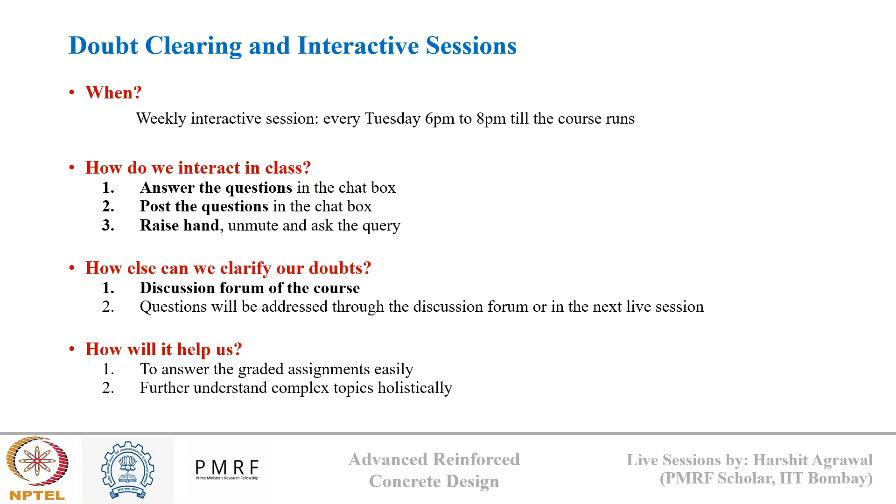In today's session, we'll first have a quick recap of the week 2 live discussion session we conducted last week, then we'll review week three learnings. In the week three recordings, it was oriented towards the durability of concrete, where we first had a basic overview of durability, then how concrete quality and aggressiveness of the environment causes durability issues was discussed, along with different ion transport mechanisms, different types of chemical degradation, mechanical degradation, and corrosion of reinforcing steel. At the end, how design codes incorporate durability consideration while mixture proportioning was presented.

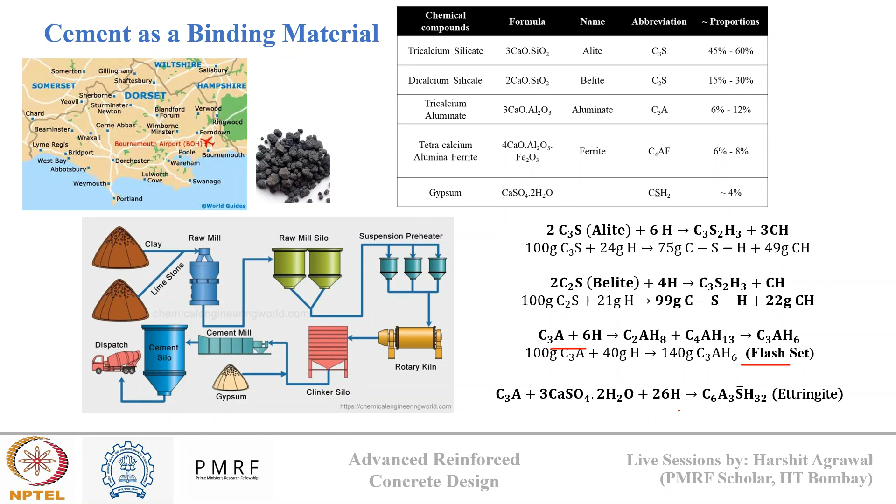Then we discussed different types of cement in detail. We discussed about different types of ASTM cements and how they differ in chemical composition, in compound composition, and what are their application areas based on their composition. We also saw the BIS classification of cement apart from this ASTM classification.

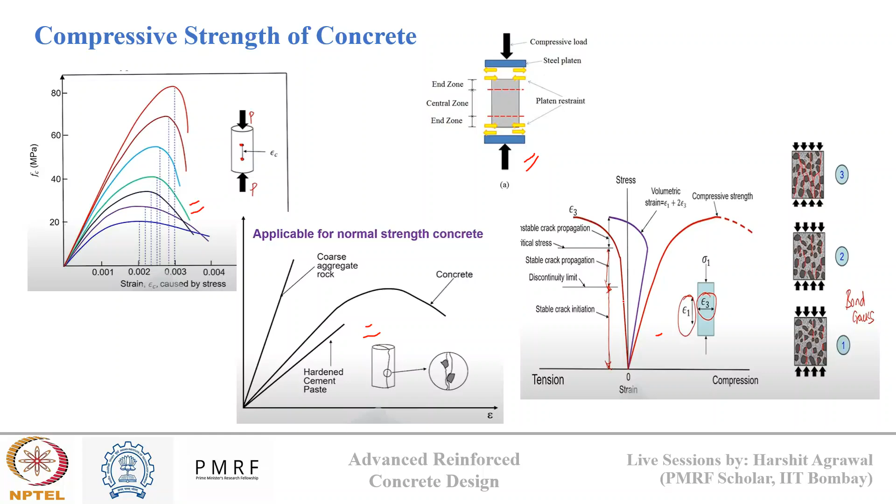Then we discussed about compressive strength of concrete, how the stress versus strain profile differs for different grades. We talked about stress versus strain profile of aggregate, cement paste and concrete and how this affects the failure plane. We talked about end platen effect and how it differs between cube and cylinder, and we saw how failure of concrete occurs in compression by seeing the crack propagation, creation of failure plane, and the change in the stress strain profile of the volumetric strain.

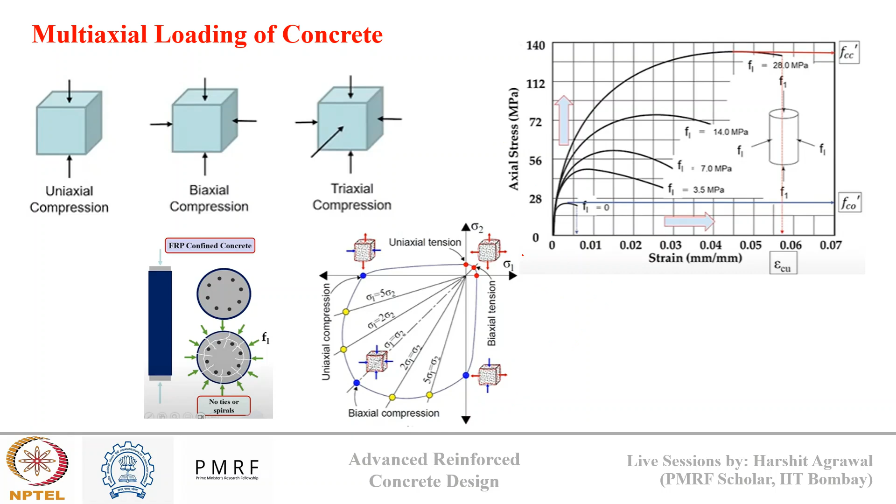We discussed multi-axial loading of concrete and how it increases the compressive strength of concrete, mainly due to the confining pressure created by the lateral stresses, which nullifies the tensile stresses generated when we apply uniaxial compression load. Apart from this, we talked about MOE of concrete, tensile strength of concrete, and then long term behavior of concrete in terms of creep and shrinkage.

Finally, we discussed steel reinforcement material, the effect of grade on the stress versus strain profile, and how this profile is used in design. We also talked about different types of alloyed and coated reinforcement, mainly in cases where corrosion is a threat, and we talked about FRP bars. What is one of the basic problems with those rebars?

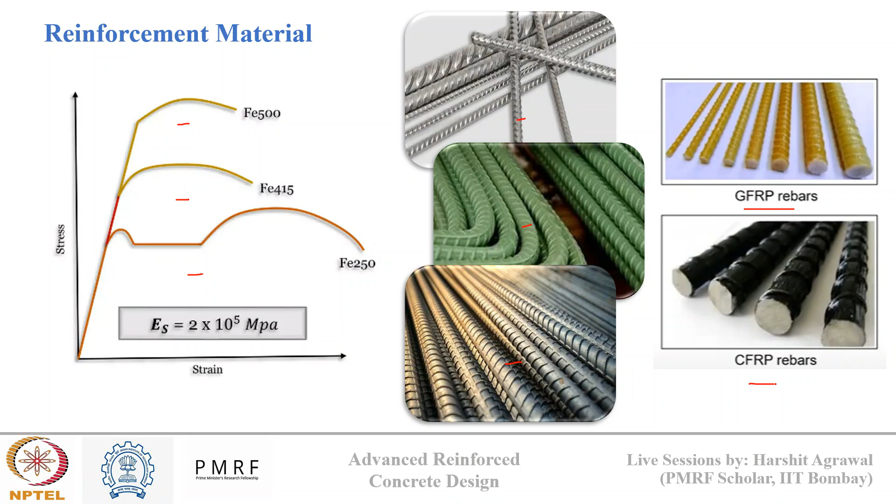Okay, so this completes the story from the last live session. Till date, we have talked about individual components of reinforced concrete, the design methods, and the mechanical properties of concrete. Now, the final segment of basic concrete discussion is the durability of concrete.

So, when we talk about modern day concrete applications, is having adequate strength enough for concrete design? The answer is no, it is a clear no. Why? This is evident from the rising environmental concerns that we see, which leads to premature deterioration of modern structures. That's why durability of concrete has become as important a factor as strength of concrete.

Now, what is the technical definition of durability? What do you mean by durability? If we see the definition given by ACI code, durability of concrete is defined as its ability to resist weathering action, chemical attack, abrasion, or any other forms of deterioration. So this is what durability as a word means.

But now, when do we say that a concrete is durable? How do we define concrete as a durable material? For that we have a definition given by IS code. A durable concrete is defined as one that performs satisfactorily under expected exposure conditions for a specified service life or lifespan of a structure.

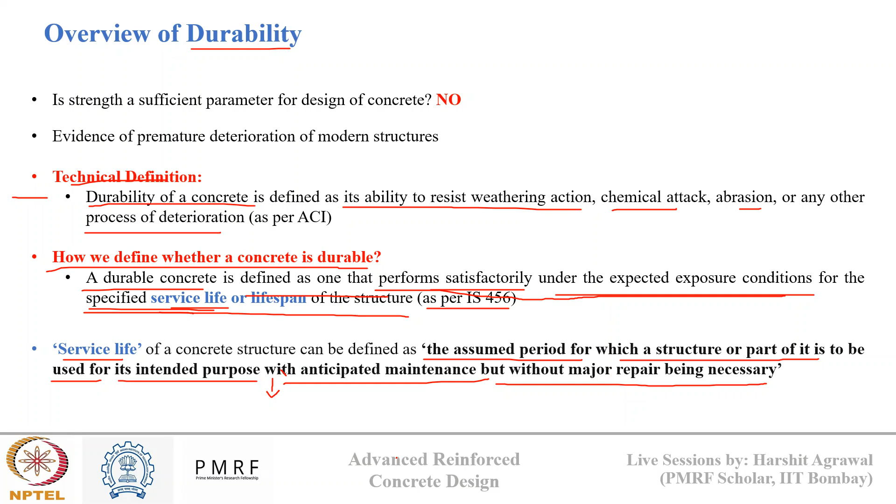Now this concrete system quality will depend upon both the material used and the process of preparation of concrete. By material I mean the binder type, binder content, aggregate, admixture, and mixture design. All will define the quality of concrete.

And the process — by process I mean how the mixing is done, how the transportation is done, how the compaction is done, whether it is cured properly or not, whether it is cured at adequate temperature or not, and whether proper workmanship was ensured while concreting. It will also define the quality of the concrete that is produced.

And if there is poor quality concrete, there will be a high risk to durability. If there is good quality concrete, the risk to durability will be reduced. So this is the concrete side of durability.

And the aggressiveness of the environment decides the degradation or deterioration of concrete, even for a bad concrete or a good concrete, any kind of concrete. So aggressiveness of environment again can be divided into two categories: it can be physical or it can be chemical. In physical we have abrasion, erosion, cavitation, and freeze-thaw, which we'll discuss later in this session.

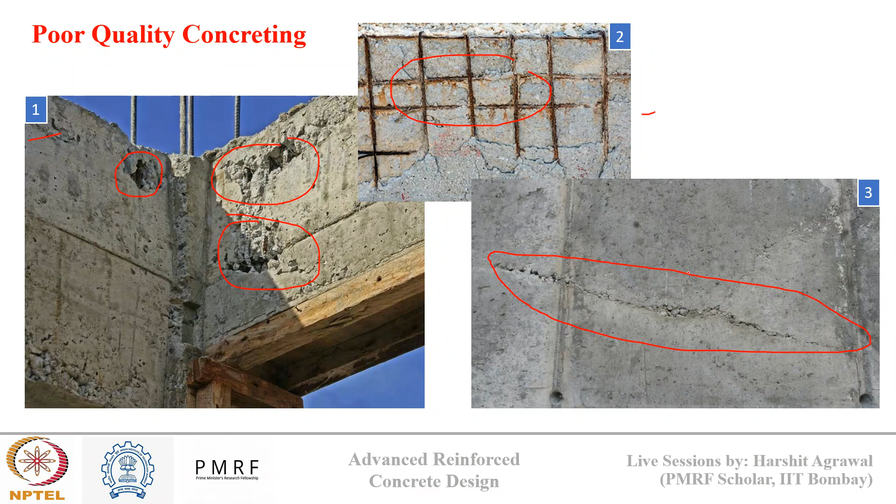And in the third image you can see the presence of a cold joint in this wall, which can happen if there is a significant time gap between two pours of a concrete mix. So this can also give rise to durability issues. These are just some examples of this second part, the process, showing how process can cause durability issues.

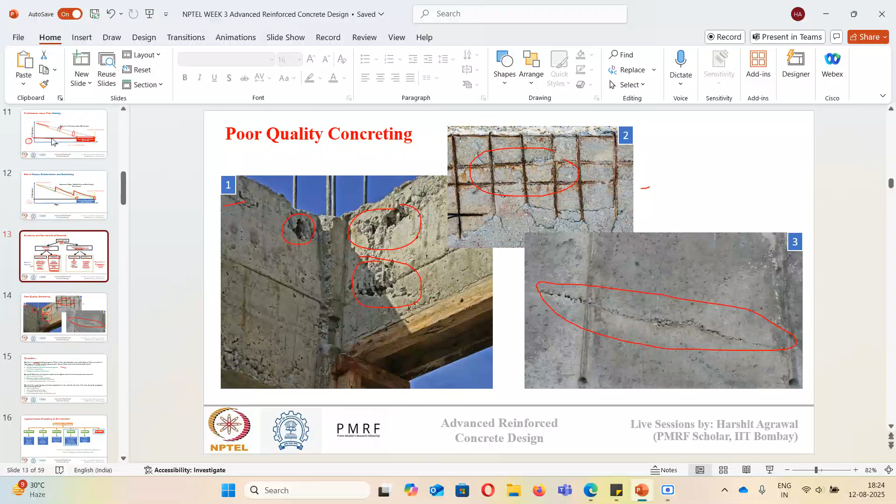Now question number 3. Has anyone answered? Okay, let's discuss. In a graph showing performance degradation versus time, what does the slope of the curve during the propagation phase primarily represent? This entire decrease is the propagation phase, where performance is degrading over time. The correct answer is D, the speed of deterioration due to environmental action.

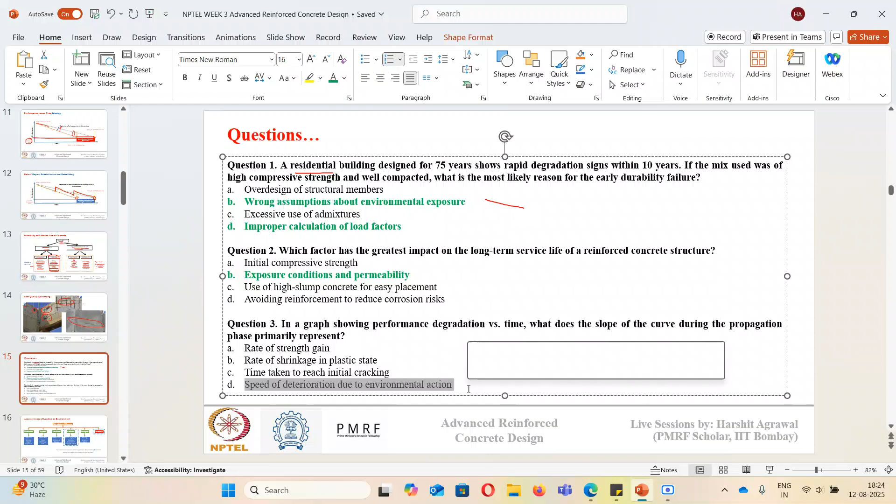If the slope of this line is steeper, it means there is a higher rate of degradation happening to the performance of concrete. If the slope is less, that means the performance is able to retain for a longer time, so the degradation of performance is lower.

Let's move ahead. Talking about durability of concrete, it can happen in several ways. There can be several reasons which cause durability issues in concrete. There is mechanical degradation, which can happen due to abrasion, erosion, impact, and explosion. There is physical degradation, which can happen due to freeze-thaw impact, creep and shrinkage as we've seen in the last session, and due to fire as well. Structural degradation can happen due to overloading, settlement, and fatigue.

In overloading, incorrect consideration of load factor can give rise to overloading issues. Fatigue is a long term effect that can come from creep and shrinkage, and settlement is due to poor consolidation of the soil underneath. There's also chemical degradation which can happen due to different chemical reactions occurring in concrete, biological degradation due to fouling and biogenic attack, and corrosion of reinforcement steel.

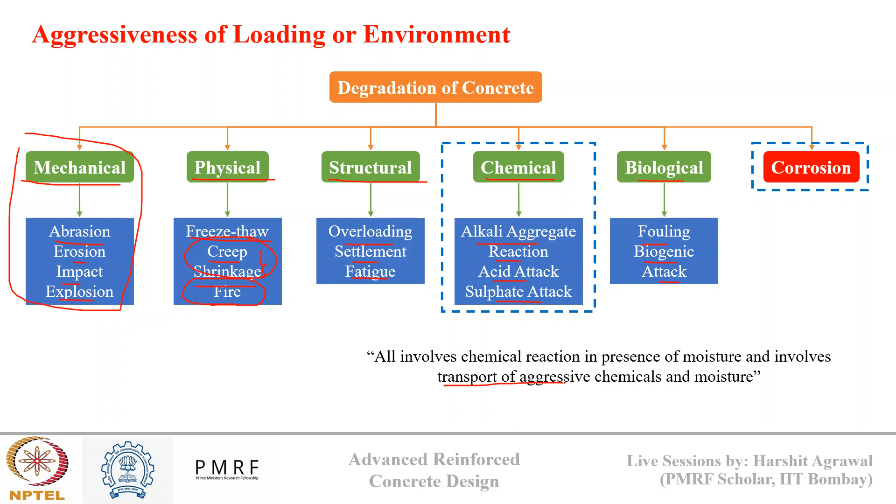Today we'll mainly be discussing chemical degradation, mechanical degradation, and corrosion. Among these, both chemical degradation and corrosion involve the presence of moisture as a key agent contributing to the ingress of aggressive ions passing through the concrete. The lower the permeability of concrete, the better it will be able to resist aggressive environments. That's why transport of ions through concrete is also a major point in durability.

When we talk about transport of ions or moisture, they can be affected by several factors, clubbed into three categories. First is the quality of cover: both cover thickness and pore structure inside the concrete will govern the rate of moisture and ion ingress. Lower cover thickness means faster penetration to deeper depths, and more pores inside the concrete means easier penetration of ions and moisture.

The second category is environmental conditions, defined by the availability of moisture in the atmosphere, the availability of aggressive ions, and the temperature of the surroundings. The more severe the exposure, the higher the durability risk, and the more moisture available, the higher the chances of ion penetration into the concrete. These two are direct reasoning that you can understand.

Temperature is also a factor, because it can lead to moisture evaporation and cracking in the cover, which is why it is included in environmental conditions. In hot and humid weather, there are chances of more creep and shrinkage effect occurring in concrete, which can also give rise to durability issues.

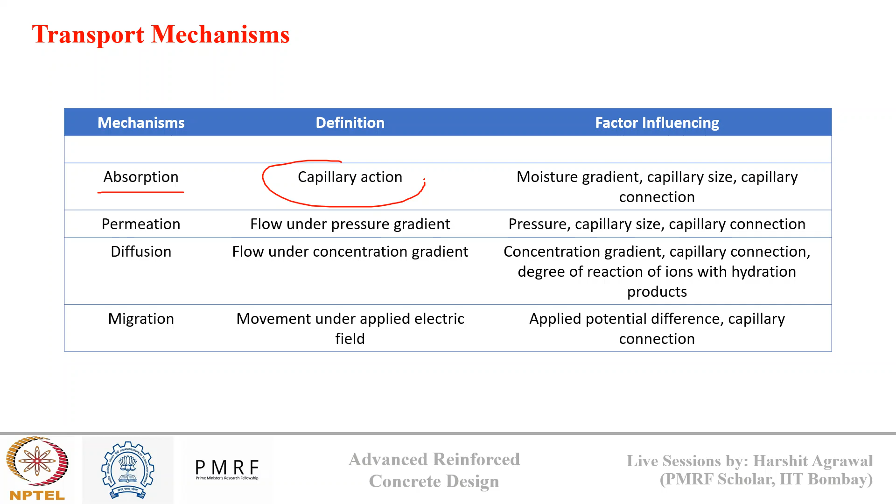So here, if you see all these four transport mechanisms and what factors influence them: when we talk about absorption, it is the capillary action, the movement of moisture from higher concentration to lower concentration, and that is defined by the moisture gradient present, the capillary pore size, and the pore connection.

In concrete, there are different types of pores - capillary pores, macro pores, and micro pores, mainly if we classify. This absorption is governed by the macro pores, in which we have the capillary pores. So how these pores are distributed, what are their sizes, and how they are connected, that will govern the ingress of moisture.

Then there's permeation. Permeation is basically flow under a pressure gradient. From higher pressure to lower pressure, the flow of ions can happen, and that will again depend upon the capillary size, capillary connection, and the amount of pressure gradient present.

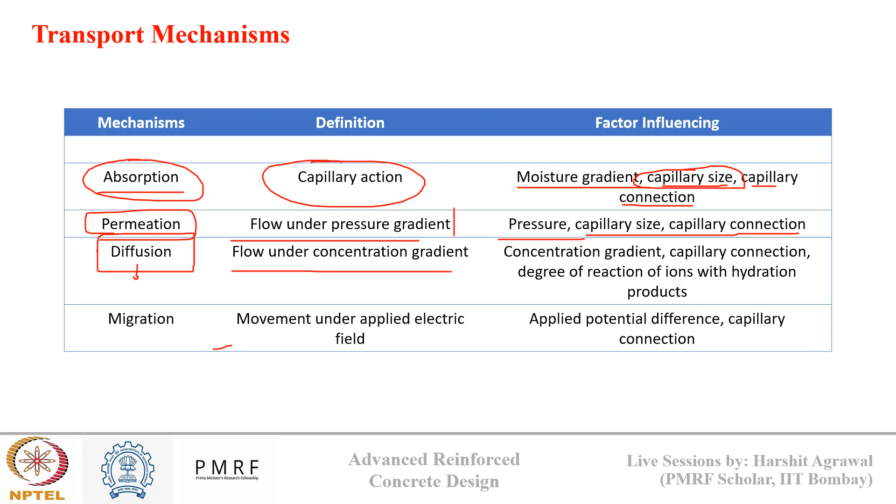The third and very common mechanism of degradation in concrete is diffusion, defined as flow under a concentration gradient. Suppose my environment has a higher concentration of aggressive ions, and in my concrete system there is low concentration of ions - due to this there will be diffusion from higher to lower concentration. This is defined by the concentration gradient; the difference between these two will define the rate at which diffusion occurs.

Then capillary connections is one thing that will define how fast they are moving inside concrete. The degree of reaction of ions with hydration products is one more thing - there are certain ions in the environment that can interact with the paste system inside the concrete. So the degree of reaction of these ions with the paste system can also govern the rate at which they move inside, and that can govern the rate of diffusion of ions.

And then there is migration. Migration is the movement of ions under an electric field. The first three categories we saw are naturally occurring. Migration is something that is forced - we apply an electric field using a direct current supply and force ions to move inside.

So suppose there are negative chloride ions present in the atmosphere, we force them to move inside towards the opposite electrode - from the negative electrode to the positive electrode, so these ions are attracted towards the positive electrode. We are migrating these ions forcefully towards the steel reinforcement or towards the other side of concrete. That is what is known as migration - forceful movement of ions under an applied electric field.

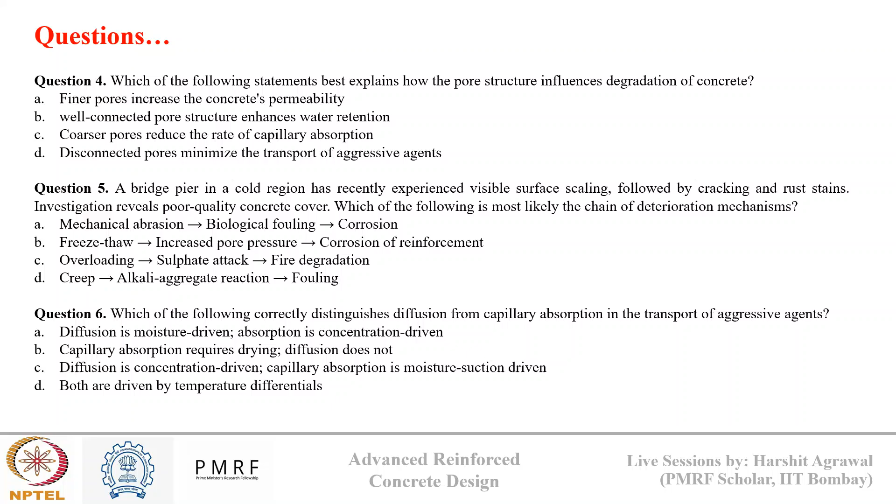Let's see the answers now. For question number 4: which of the following statements best explains how the pore structure influences degradation of concrete? The correct answer for this will be D - if there are more disconnected pores inside the system, the connectivity of pores will be lower, so that will minimize the transport of aggressive agents or ions through concrete.

Someone answered B also: 'well connected pore system enhances the water retention.' Here, water retention means the amount of water inside the concrete - we don't want more moisture inside the concrete. So this is a negative statement, not a positive explanation of how pore structure is influencing the degradation. Here the influence we mean is in terms of movement of transport ions.

Question number 5: a bridge pier in a cold region has recently experienced visible surface scaling followed by cracking and rust stains. Investigations reveal poor quality concrete cover. Which of the following is most likely the chain of deterioration?

Okay, so here the keywords are cold region, surface scaling, cracking and rust stains, and poor quality cover. So from this, can anyone predict what can be the reason?

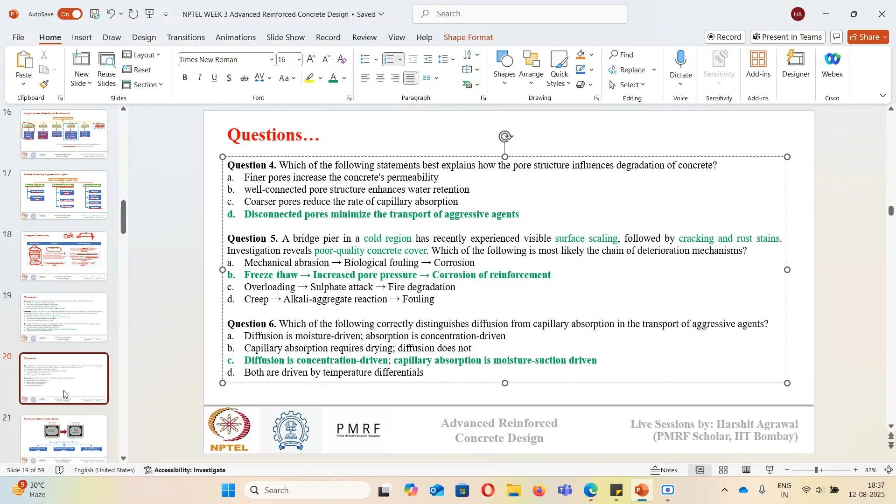Try to answer these two more questions related to the contribution of pore structure or pore connectivity of concrete.

I'm having a headache - too much screen time in one day. 40 slides left.

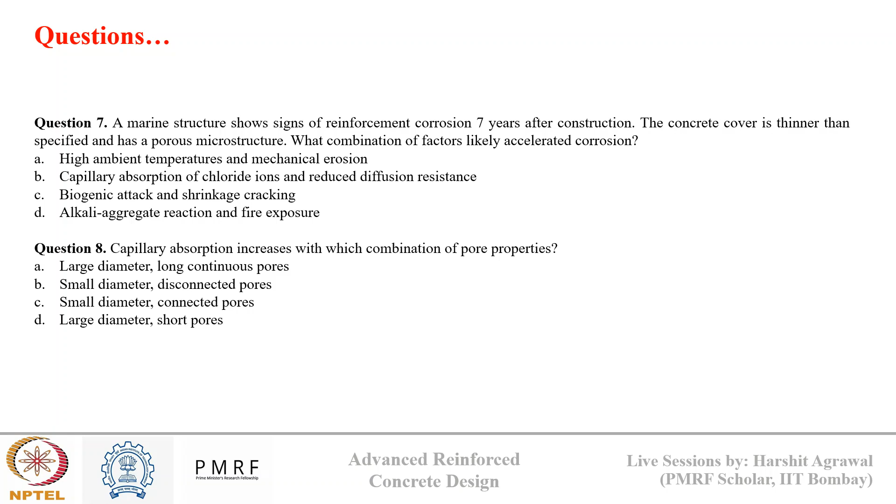Okay, let's see the answer. For question number 7: a marine structure shows signs of reinforcement corrosion 7 years after construction. The concrete cover is thinner than specified and has a porous microstructure. What combination of factors likely accelerated corrosion? Okay, so it will be option number B.

Since there is a porous microstructure, there will be capillary absorption of moisture and chloride ions, which has accelerated the diffusion process, reducing diffusion resistance. Since the diffusion of ions was accelerated, corrosion was visible well before it should have been. And since the cover is also thinner, the ions will reach deeper depths before they should have, so that's why option B will be correct.

Question number 8: capillary absorption increases with which combination of pore properties? Okay, so the correct answer for this will be...

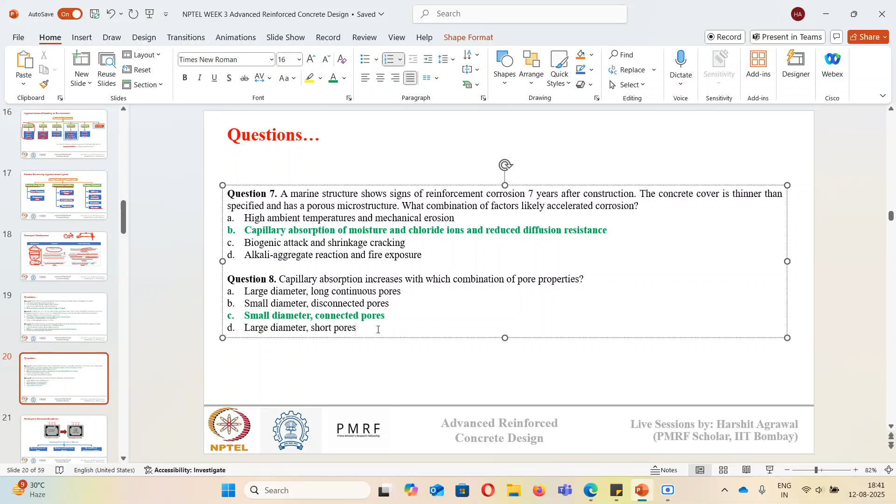So smaller diameter and connected pores will be the correct option. Smaller diameter generates more capillary pressure for ion ingress, and connected pores ensure that ions and moisture move to a larger depth. In larger diameter pores, the capillary effect is not as strong as compared to smaller diameter pores. B won't be correct because those pores are disconnected - if you want to increase capillary absorption, we need connected pores, not disconnected pores.

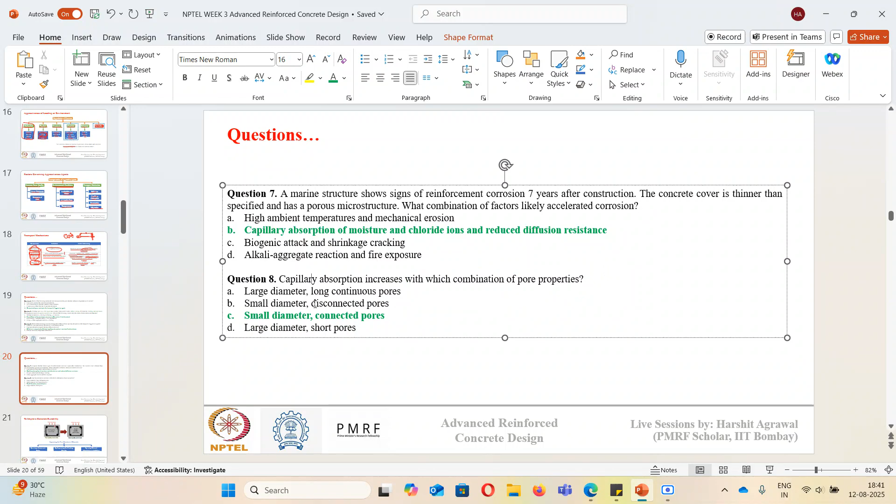Any doubts in these questions? Okay, let's move to the next part.

So we saw that in transport of ions, it's the poor quality of concrete cover which is a major issue. So to improve the durability of this cover concrete, it is important to use a good quality concrete for the cover. So in poor quality cover concrete, what will happen?

Deleterious or deteriorating ions will reach the reinforcement fast, or they will penetrate to a deeper depth fast. However, if you use a good quality cover concrete, this rate of movement of ions will be lower, so we will have a good quality concrete for a longer life.

Now, how to improve the durability and quality of concrete? This can be done by improving the pore structure of concrete, which can be achieved in one of three ways: using a lower water to cement (W/C) ratio, improving the packing density of concrete, or using mineral admixtures as additives.

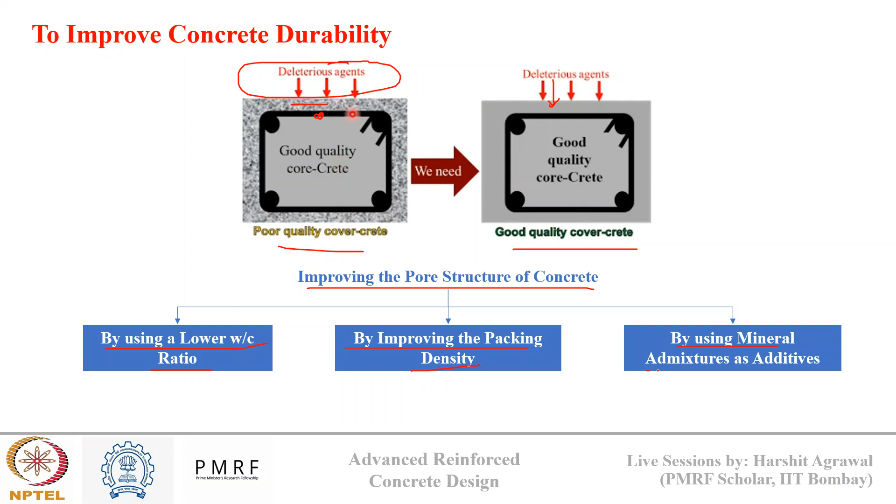When there are more pores in the system, they provide an easier path for moisture and aggressive ions to penetrate through the concrete. So having a lower W/C ratio gives us a dense, compact microstructure with fewer, smaller, and more disconnected pores, which significantly reduces permeability and increases the durability of concrete.

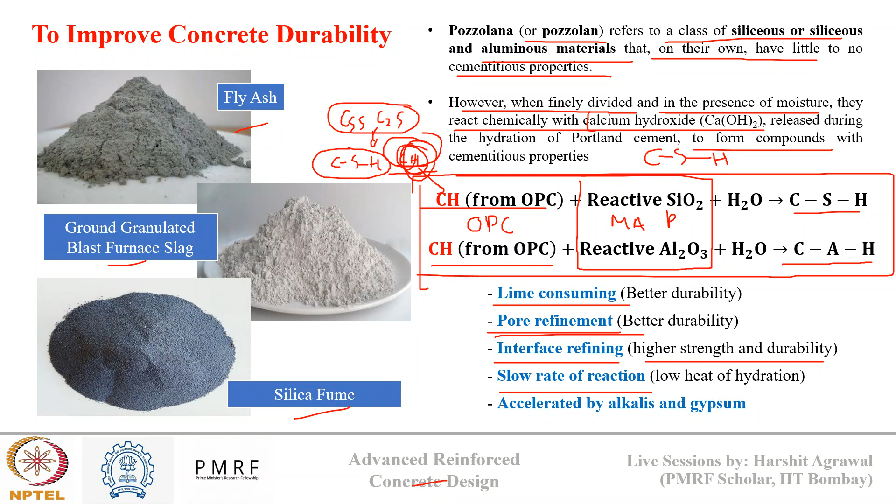These reactions sometimes have a slow rate of reaction because they depend upon the CH released by the C3S and C2S from OPC, and this CH is what is consumed by these pozzolanic materials. So they have a slower rate of reaction and a low heat of hydration, which means they don't cause durability issues in terms of cracking. If we need to accelerate this, we can do so by addition of alkalis and gypsum.

This is beyond the scope of this course, so you can just remember the key points: lime consuming, pore refining, and interface refining. At the same time, it has a lower heat of hydration. So in this way, they can improve the durability of concrete by forming a more dense microstructure.

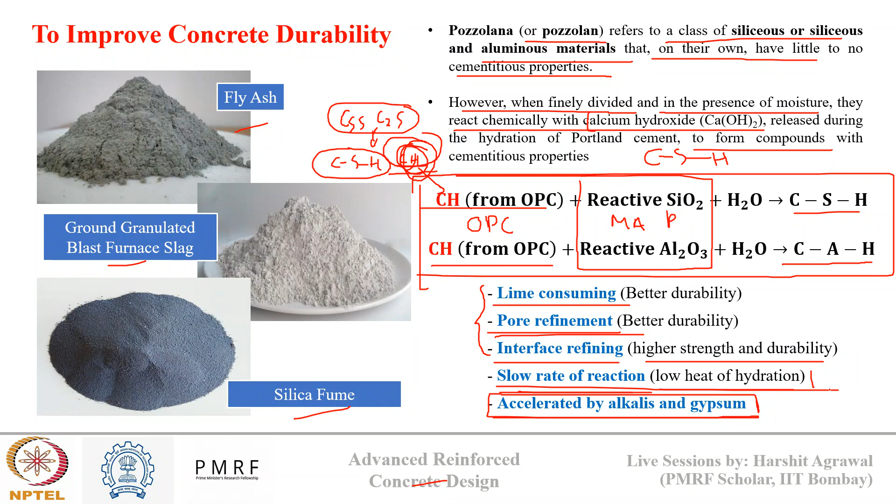Then there are accelerators, which do the opposite - they speed up setting, which is needed especially in cold weather concreting where we need faster strength gain and early strength gain.

Then there are shrinkage reducing agents which minimize cracking due to shrinkage issues. There are superplasticizers which improve the flowability of concrete, so there is less chance of honeycombing when we are pumping the concrete.

There are air entraining agents which resist the freeze and thaw effect in concrete - we'll see why we need pores inside concrete in cold climatic conditions. And finally there is corrosion inhibitor, which forms a kind of protective layer over the steel surface, protecting it from aggressive ions and increasing durability.

So these are some of the ways chemical admixtures contribute to enhancing durability of concrete. All in all, each admixture plays a vital role in extending the service life of concrete, and the choice of admixture depends upon the condition, the aggressiveness of the environment, or the quality of concrete we want to produce.

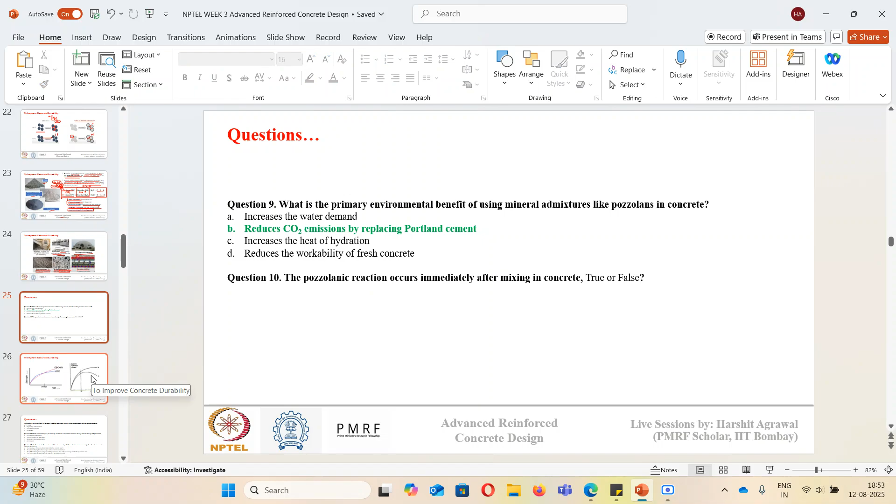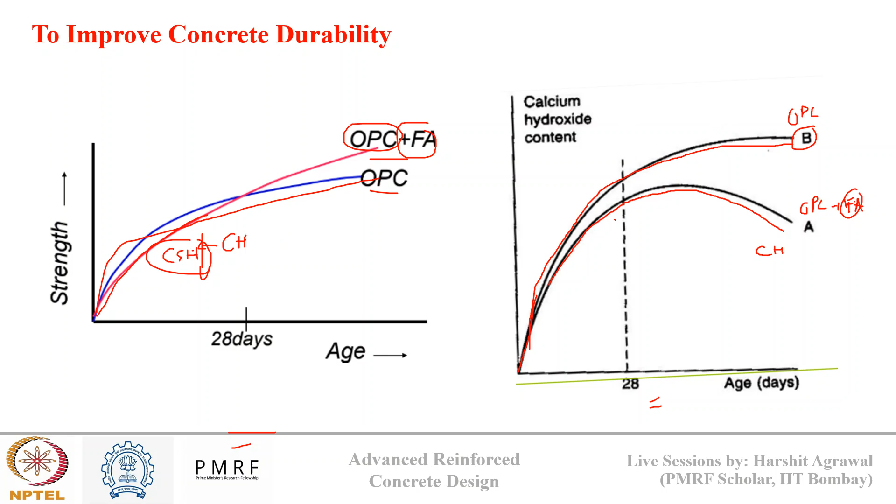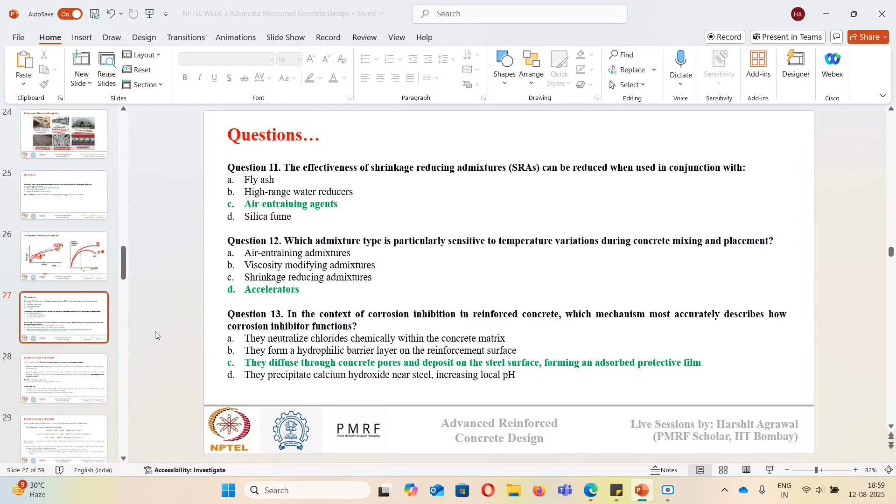All these are admixtures, so they are used initially during concreting. Any doubts in this part? Let's move ahead.

Now we'll start with chemical attacks, beginning with sulfate attack. Sulfate attack is basically the reaction between sulfate ions and the hydrated cement paste products. There can be two forms of sulfate attack: external sulfate attack and internal sulfate attack. External sulfate attack means sulfate ions are ingressing into concrete from the external environment, which can be groundwater, seawater, or due to bacterial action in sewer lines. These sulfate ions ingress into the concrete and cause degradation, which comes under external sulfate attack.

Internal sulfate attack means there is a release of sulfates inside the concrete itself. In this case, formation of ettringite occurs after the concrete has hardened, which we call delayed ettringite formation—we'll see in a couple of slides how this causes a problem. So just understand the difference: external sulfate attack means sulfate ions move into concrete from the environment causing degradation, while internal sulfate attack means there is a late release of sulfate ions inside concrete causing the degradation problem.

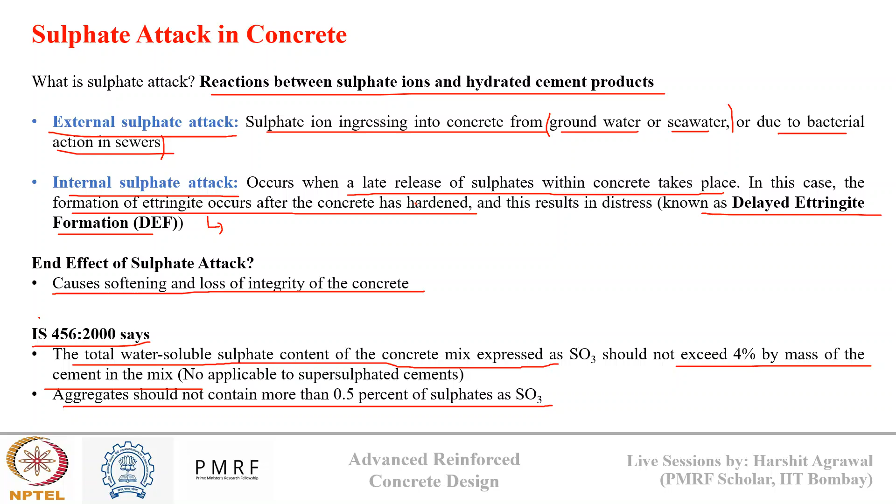Aggregates should not contain more than 0.5% of sulfate. So to tackle this degradation due to sulfate, various limits have been imposed by Indian standard.

This ettringite formation is occurring when sulfate reacts with monosulfates and C3A. So these are sulfates reacting with monosulfates and calcium aluminates to form ettringite.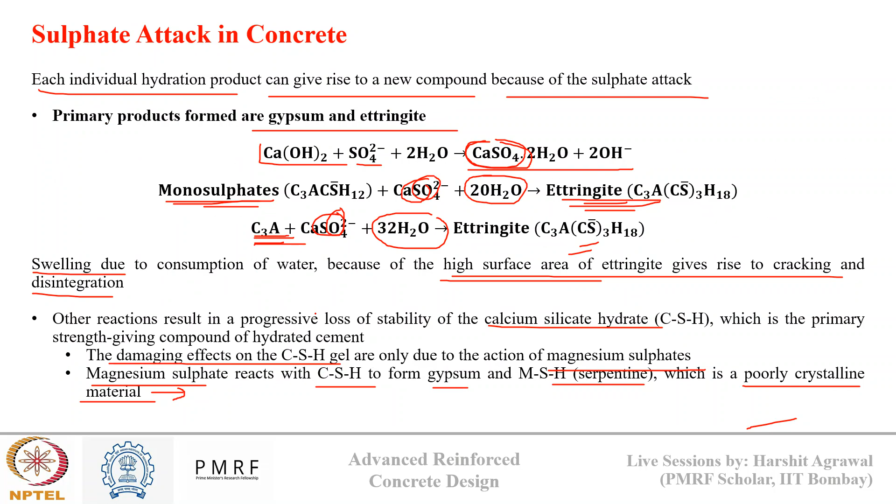So it's not just one source of sulfate - there can be different salts of sulfate which can attack concrete in different ways. This was external sulfate attack - how sulfates from the atmosphere cause problems due to swelling, causing degradation in concrete.

Now, when we talk about internal sulfate attack, there is a thing known as delayed ettringite formation - it means formation of ettringite in concrete at later ages after the initial curing period. This condition arises in concrete that has experienced higher elevated early temperature. So at initial time during curing, if there is high early temperature, which can be imposed due to heat treatment or significant internal heating or due to moisture, what happens is the formation of ettringite is not happening initially.

Initially, we have gypsum in the system - the reaction between gypsum and C3A won't happen if the temperature is very high initially. Now there is sulfate present in the pore liquid, usually for a long period, because it is not consumed initially. However, at later ages, once the concrete has hardened, this temperature will reduce, and then sulfate will start reacting with calcium and aluminate phases to form ettringite.

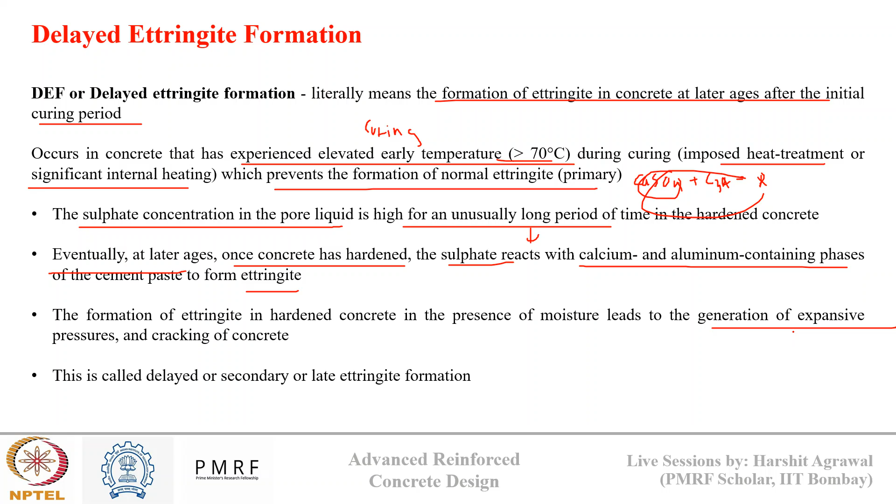This delayed reaction of sulfate and calcium aluminate phases gives rise to expansive pressure because ettringite has higher surface area, and it causes cracking in concrete. This process is known as delayed ettringite formation.

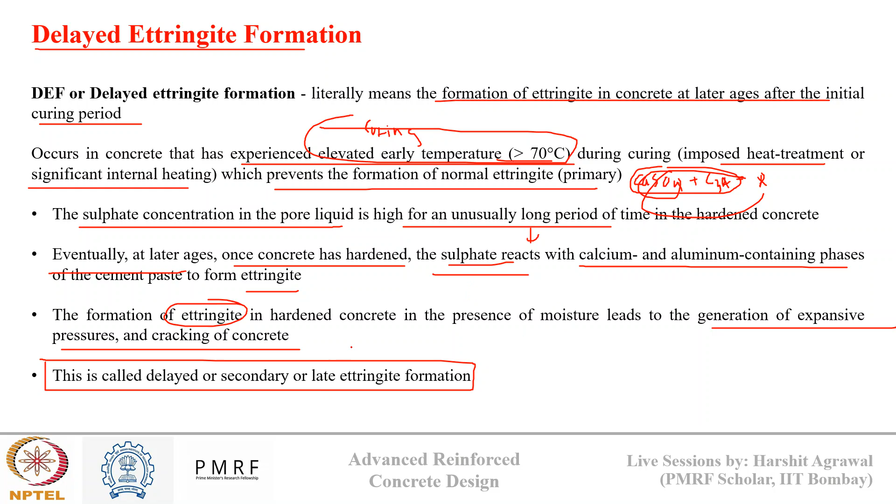So here, this elevated early temperature was the important thing which has given rise to delayed ettringite formation. Ettringite is forming at later ages than the initial age, and that ettringite has a higher volume compared to normal initial products. This higher volume, if formed in hardened concrete, can cause cracking issues. This is delayed ettringite formation.

Now we can see this effect of sulfate in the image. In the first image, you can see the paste-aggregate interface where ettringite lining is present, and it has led to 2.8% expansion. In the second image, you can see how a submerged column is experiencing bulging here and here due to sulfate attack.

And how to prevent this? We can prevent it by using sulfate resisting cement which has low C3A content - if there is low C3A content, there will be less ettringite formation and less sulfate attack happening. We can use SCMs which consume CH and create a dense microstructure that will lower the ingress of sulfate ions, making concrete impermeable. Or we can reduce the water-cement ratio also to make concrete impermeable - these can be some of the preventive measures for sulfate attack.

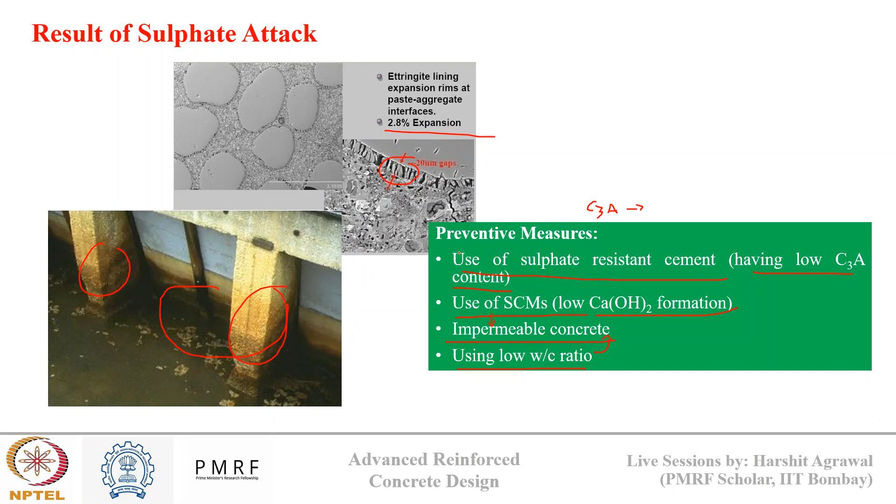Is everyone clear with the sulfate attack part? Any doubts in sulfate attack?

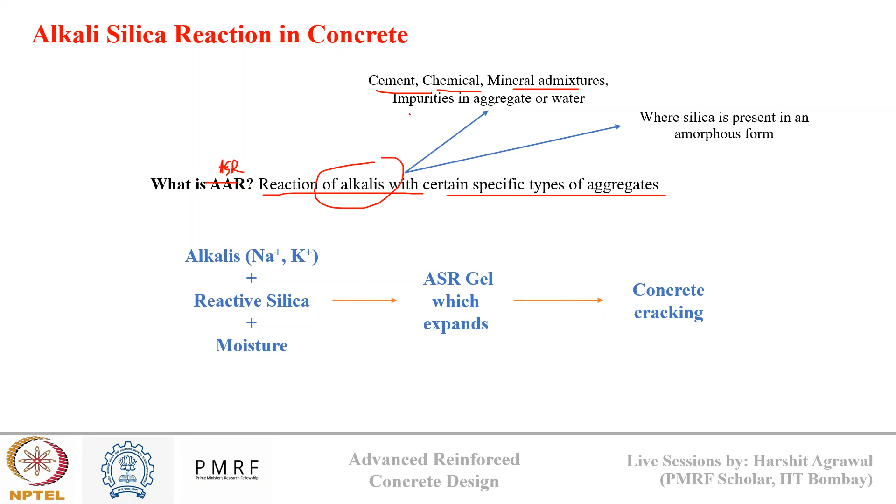Okay, so after sulfate attack, we have alkali silica reaction. So what is this? It is the reaction between alkalis with a certain type of aggregates. Alkalis are coming from cement and chemical and mineral admixtures, and maybe from impurities in aggregate and water, and silica is coming from aggregates.

So generally we want aggregates to be inert. However, if our aggregates are amorphous in nature, what will happen? They will have some reactive silica, and this reactive silica from aggregate can react with the alkalis present in the cement system to give rise to alkali silica reaction.

So if we simply write what is this alkali silica reaction: alkali ions like sodium and potassium, in the presence of reactive silica and moisture, form alkali silica gel, which is expansive in nature, and this expansive product in concrete can cause cracking in concrete.

So in both systems there is a similar thing, there is expansive product formation. When we talk about a hardened concrete system, we talk about a dense microstructure which has very small porosity or very small gap. Porosity is generally like 5 to 10% in the system.

Now in this dense microstructure, when there is formation of some expansive product, what will happen? They will generate tensile stresses inside the concrete, and that tensile stress, if more than the strength of the concrete, can lead to cracking in concrete. So that's why we don't want expansive products in a hardened concrete system.

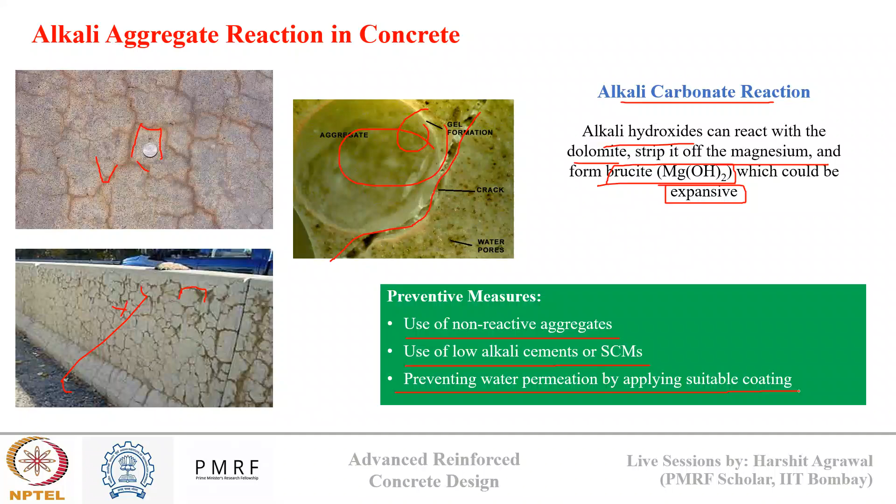How can we prevent this alkali aggregate reaction or alkali silica reaction? By using non-reactive aggregates, or by using low alkali cements or SCMs, or by preventing water permeation by applying suitable coatings on the surface. All this reaction requires water, so if we can reduce the ingress of moisture, then we can delay or prevent the alkali silica reaction from occurring.

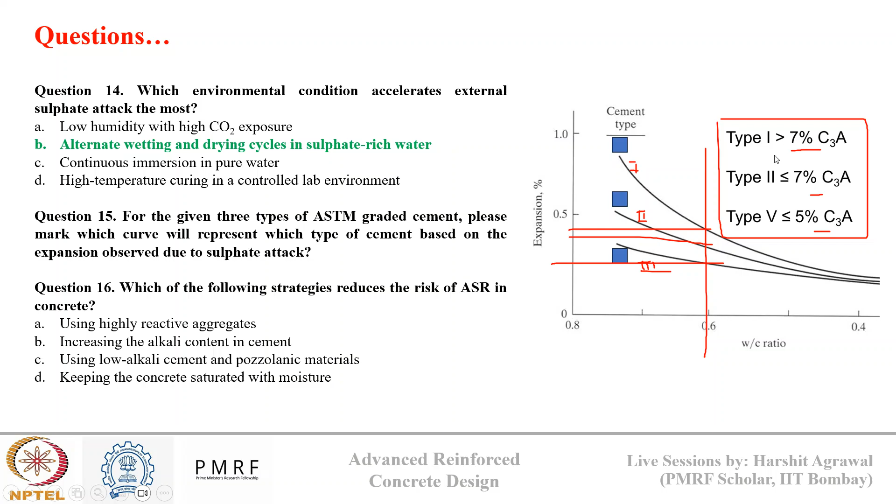For question 15, there is no option given. You need to tell me, for curve one, what cement type is present in this concrete which is represented by curve one?

If there is higher C3A content, there will be more sulfate attack chances, so there will be higher expansion - so curve 1 will represent type 1 cement. In type 2 cement, there is lower C3A content, and in type 5 cement, there is much lower C3A content. So curve 2 will represent type 2 cement, and curve 3 will represent type 5 cement. Lower the C3A content, lesser the chance of sulfate attack, and lesser the expansion. Expansion is due to ettringite formation, which swells in the presence of moisture. That expansion will be less where ettringite formation is lower, and ettringite formation will be lower where C3A is less.

Now question number 16: which of the following strategies reduces the risk of alkali silica reaction in concrete? What can we do to reduce alkali silica reaction in concrete?

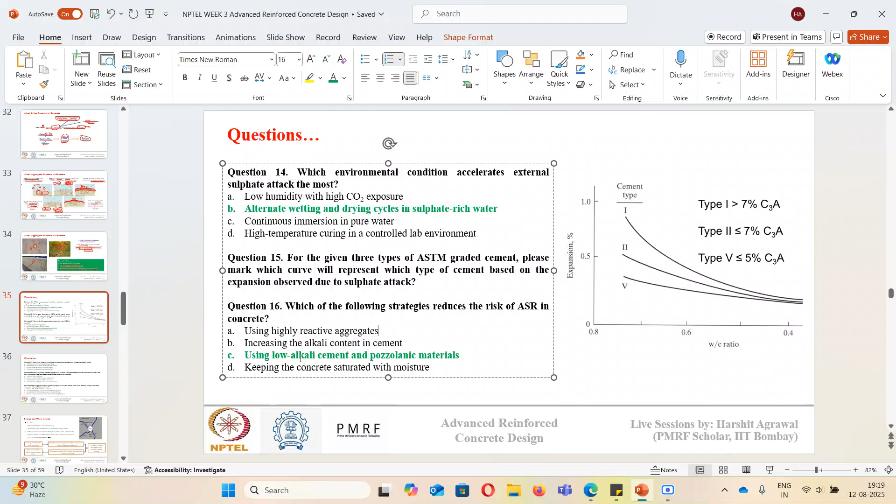The correct option is C. If we use low alkali cement, what will happen? Even if we have highly reactive aggregates, if the alkali presence is low, then the alkali silica reaction chances will be lower. And a better thing is to use pozzolanic material - it will densify the concrete and reduce moisture ingress. We saw in the alkali silica reaction flowchart that moisture is also an important step in that reaction, so if we have dense concrete, we can reduce the risk of alkali silica reaction.

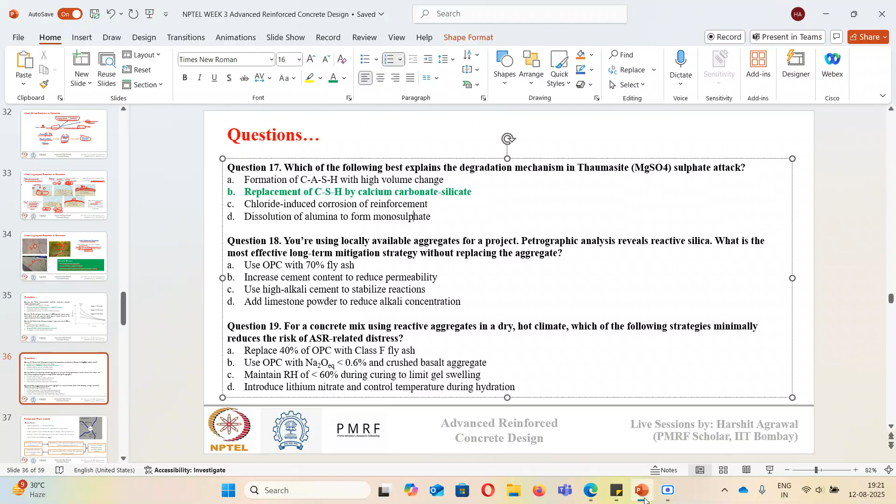For 18, the correct answer will be A. If we use a supplementary cementitious material as a replacement of OPC, we can consume alkalis, reduce the pore solution alkalinity, and refine the pore structure, which can help us reduce the alkali silica reaction chances in concrete.

Third question: for a concrete mix having reactive aggregates, which strategy reduces the risk of alkali silica reaction, and which strategy minimally reduces it? Which among these will be the least effective?

This is just a repeat of question number 18. Using OPC with fly ash will densify the pores and reduce the risk of alkali silica reaction. If we have OPC with low alkali content, we can again reduce the risk of alkali silica reaction. And sometimes introducing lithium nitrate also helps in reducing the chances of alkali silica reaction in the system.

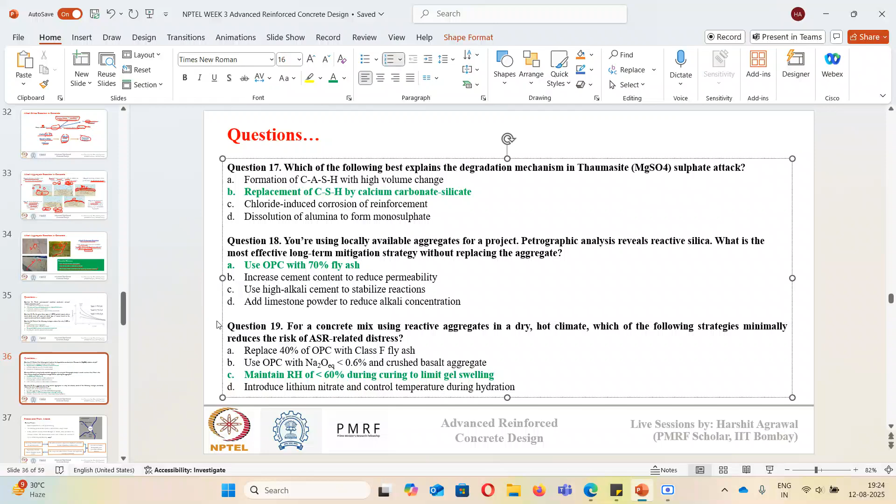Any doubts in these three questions? No, sir.

Let's move ahead to the final part of chemical degradation, that is freeze and thaw reaction. What are the critical points we need to take care of while understanding freeze and thaw? One thing is water expands by 9 to 10% upon freezing, so when water converts into ice there is an expansion of 9 to 10%. The freezing point of small pores is depressed by a larger extent, so the freezing point of small pores is much lower than big pores. Suppose water in a big pore is freezing at 0 degrees Celsius, the same water in small pores will freeze at minus 20 degrees Celsius.

If concrete remains frozen throughout its lifetime, it is not much of a problem. However, deterioration occurs only when there are successive cycles of freezing and thawing. Frozen water in concrete is not a problem; it's the repeated freezing, then conversion to water, then conversion to ice again, that causes deterioration in concrete. Now let's see how this occurs and why freezing and thawing is a problem.

Freezing of water starts in capillary pores. We've seen that larger pores freeze earlier than smaller pores, so the water in capillary pores will freeze first. Due to this, ice formation will start, and as ice formation starts, the unfrozen water experiences hydraulic pressure due to the formation of volumetric, expansive ice. This hydraulic pressure causes the water to start moving inside the pore system.

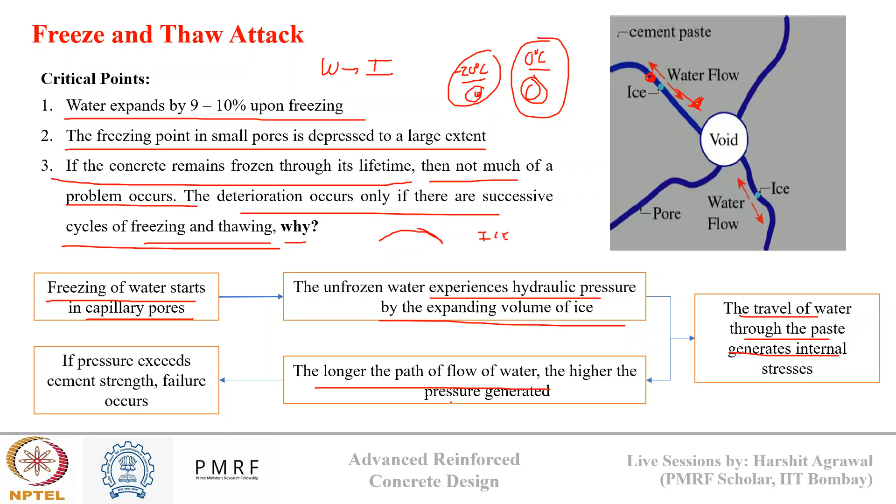Water will start to travel through the paste, and this movement generates stresses. The longer the path of flow of water, the more pressure it will generate. If this pressure exceeds the cement strength, it will cause failure in the concrete. So pressure generates and releases repeatedly, and over successive cycles this causes fatigue in the concrete system, leading to cracking and degradation of concrete.

Now, in such cases, that's why we have air entraining agents. What air entraining agent does is deliberately add voids inside the concrete. Now when water is moving inside the concrete due to formation of ice, if there's a void, it will be able to release its pressure that is getting generated due to water movement. And that's how air entraining agent mitigates the freeze and thaw problem inside concrete. They provide a relief station for water movement.

Here you can see some examples of what happens due to freeze and thaw attack, or frost action. In the first image, you can see how frost action causes rock to crack. Initially water was collected. Now water freezes and expands, which causes cracks in the rock. As the ice melts, the water penetrates to deeper depth. Then it freezes again, expands, and causes the crack to propagate further inside. In this way water goes deeper and deeper inside the rock, and finally it will crack the rock. So it is the freeze thaw effect causing the cracking.

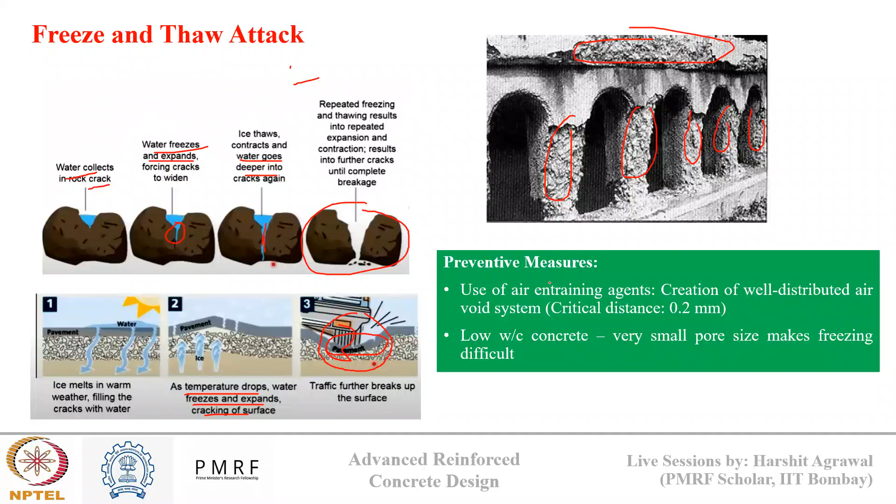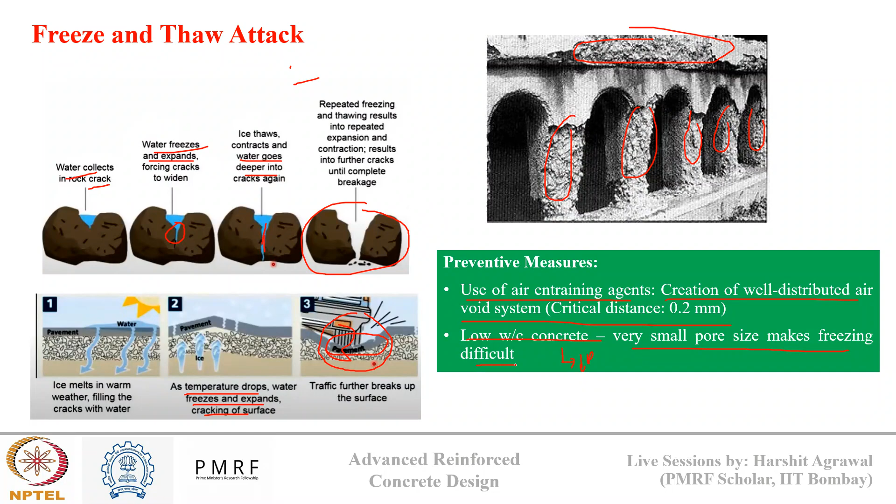Now, how can we prevent this? By using air entraining admixtures. They create well-distributed air voids in the system, which act as a relief point. Or we can use a low water to cement ratio concrete. This decreases the porosity in concrete. We saw that if there are smaller pores, freezing won't happen at higher temperatures. So very small pores make freezing difficult, and if freezing is difficult, this freezing and thawing effect will be reduced.

Any doubt in this part, in the freeze and thaw reaction part?

Okay, so let's move to the next segment. The next segment of degradation is corrosion in reinforcement steel.

Now, before understanding what corrosion is doing, we need to understand that corrosion is a natural phenomena. This will occur, we can't stop corrosion from happening. Why? Because initially in the ores, we have iron ore like hematite, magnetite, where iron is present in the form of oxide. Now when we make steel, we process this ore into steel, which is Fe. So we are giving energy to the system, increasing the energy state of the system. But what does the law of nature say? Every metal or material is stable in its lowest energy state. So this metal will start to try to convert back to its lower energy state, which is this ore state. And this process is what is known as corrosion. It is a natural phenomena, we can't stop it. We can control it, we can delay it, but we can't prevent corrosion from happening.

However, when we talk about a reinforced concrete system, the pore solution or porous matrix in concrete is rich in alkali ions, like NaOH, sodium hydroxide, potassium hydroxide, and calcium hydroxide. These are rich in the pore solutions or pore spaces of concrete, which causes high pH in concrete. And when there's high pH in concrete, there's a mechanism known as passivation of reinforcement steel. So when the steel rebar is present in a high pH environment, a protective film forms over the steel rebar, known as the passive film. This passive film shields it from further corrosion, reducing the rate of corrosion. The natural corrosion rate at which this reaction occurs will be reduced due to the presence of this passive film.

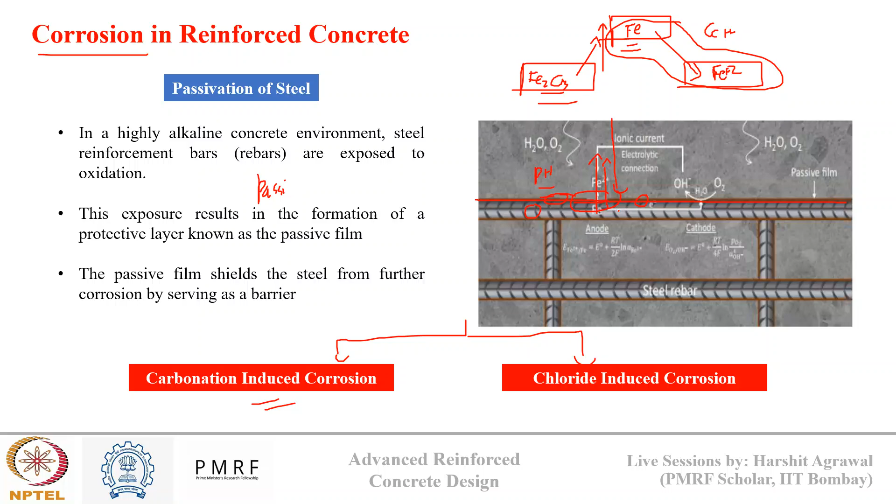And these products all have a higher volume, they occupy more volume than the original steel. Now inside concrete, as we saw with sulfate attack and other attacks, if there's high volumetric material present inside dense concrete, it can lead to tensile stresses, and if these stresses exceed the strength, they can cause cracking in the concrete.

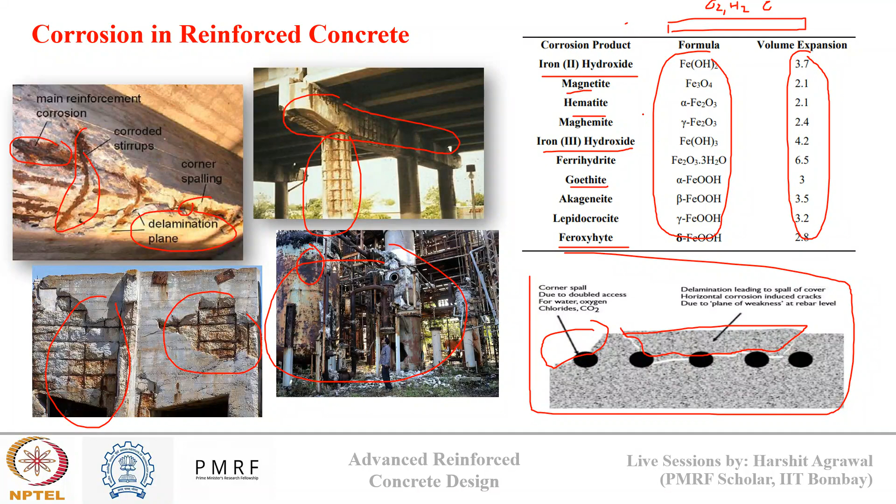Now this degradation due to corrosion, due to aggressive ions, happens due to two reasons: direct effect and indirect effect. Chloride induced corrosion causes direct effect on steel, and carbonation induced corrosion causes indirect effect on steel. How? When steel itself gets affected due to aggressive ions, we say it is a direct effect.

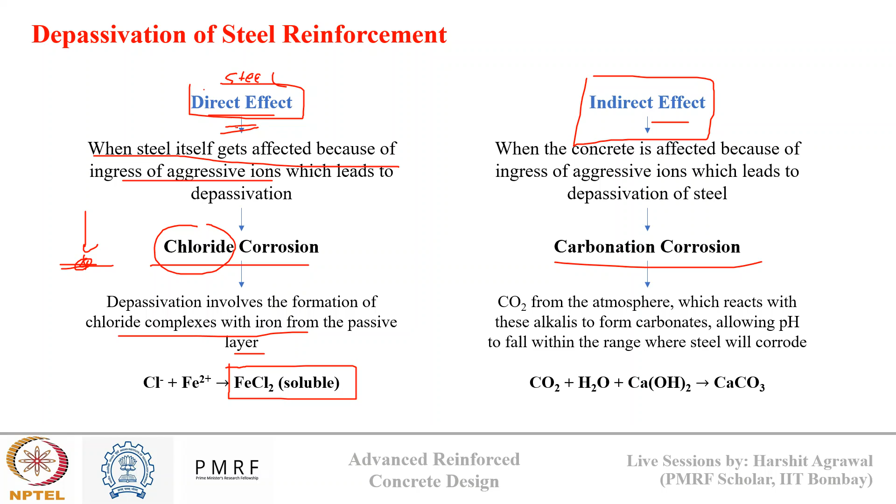So what happens: these chloride ions ingress through the cover concrete, reach the passive layer, depassivate it, and react with the iron to form soluble compounds. That's why we say it has a direct effect on steel - it is not disturbing the concrete, but directly affecting the steel reinforcement. By indirect effect, we mean when the concrete is affected because of aggressive ions, which causes depassivation of steel, and that is done by carbonation.

So in carbonation, what happens? CO2 from the atmosphere, in the presence of moisture, reacts with the calcium hydroxide present in the pore system to form CaCO3. Now, we know we need a high pH environment inside concrete for passivation to occur. If CH is consumed, the pH of the concrete will reduce.

If the pH of concrete reduces, what will happen? My passive layer, which formed over the steel surface, will collapse. And if my passive layer collapses, oxygen and moisture from the environment can interact with the steel and increase the corrosion rate. So that is carbonation induced corrosion - it is not directly affecting the steel, but it is affecting the concrete, which is affecting the steel. That's why we say it is an indirect way of corrosion.

Any doubt in this part related to corrosion? What do you mean by passive layer? What is happening when corrosion is happening? What are the corrosion products? How are they causing cracking in concrete, and how do chloride and CO2 cause corrosion inside concrete?

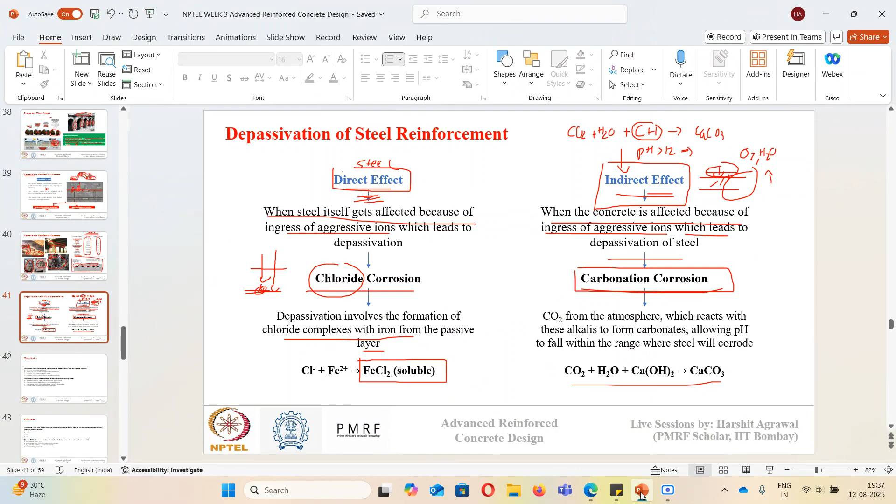Okay, just try to answer these questions. The things that I have not covered in the theory, I will try to address through questions so that the corrosion concept is clearer to you. So just quickly try to answer these questions.

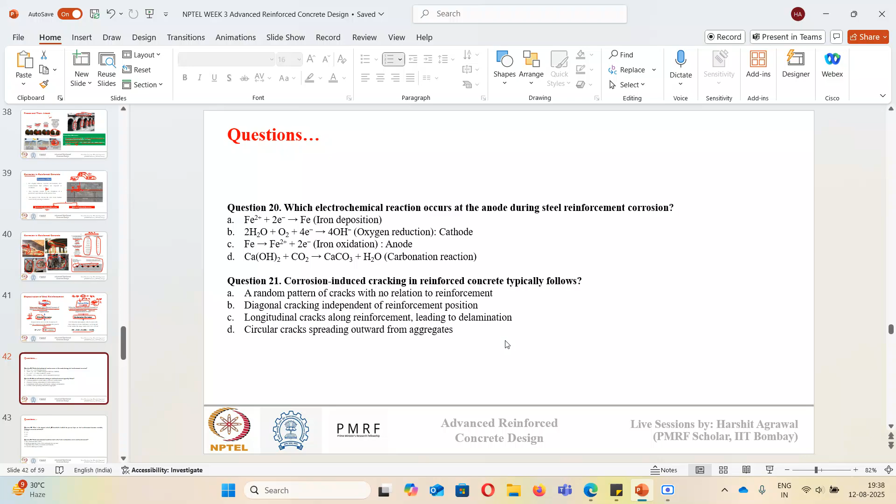Okay, let me answer question number 20. Which electrochemical reaction occurs at anode?

I will give you the basis behind this. When we talk about corrosion, there are two reactions: anodic reaction and cathodic reaction. Anodic reaction is oxidation and cathodic reaction is reduction. So oxidation is happening - iron is present in Fe2 plus and Fe3 plus. When we convert it into metal or steel, it converts into Fe. Now it will try to convert back into Fe2 plus and Fe3 plus. So this is oxidation reaction.

So at anode, what happens? Fe is converting back into Fe2 plus - this is known as anodic reaction. Now it will release some electrons. I need these electrons to be consumed for this reaction to continuously move forward, and that is done by the reduction reaction. Oxygen and moisture from atmosphere consume these electrons to form hydroxide ions. Finally, ferrous ion and hydroxide ion combine to form ferric iron oxides and hydroxides that we saw in this slide, which are the corrosion products that are expansive in nature. So this is the net corrosion reaction that is happening.

So for question number 20, which reaction occurs at anode - the correct answer is C. Iron oxidation is something which is occurring at anode.

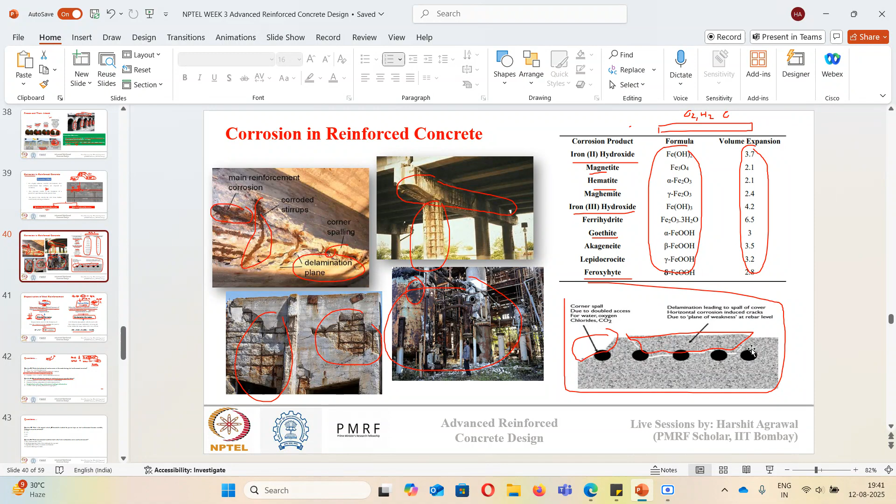So for 21, the answer is C. When we talk about corrosion cracking, it is a longitudinal crack that occurs along the reinforcement length. In all these cases, you can see there are longitudinal cracks that are generated - like in this image, there were longitudinal cracking that led to spalling and delamination. The same thing you can see here also - it is a longitudinal crack that is generating.

Try to answer question number 22. It is related to carbonation induced corrosion, and 23 also is related to carbonation corrosion. Remember the reaction that I told here - I will just copy this part. Remember how CO2 is reacting, what it is doing to the system. Now, based on this, try to answer these two questions.

Can anyone tell me the answer for question number 22? What is the typical critical pH threshold at which passive layer of steel reinforcement becomes unstable? The correct answer is C. pH of concrete is initially usually in the range of 12 to 13. Now due to carbonation, CH is getting consumed, so pH will reduce from 12. When this pH comes below 9, the passive layer becomes unstable. It will break, and that will lead to corrosion commencement at the reinforcement.

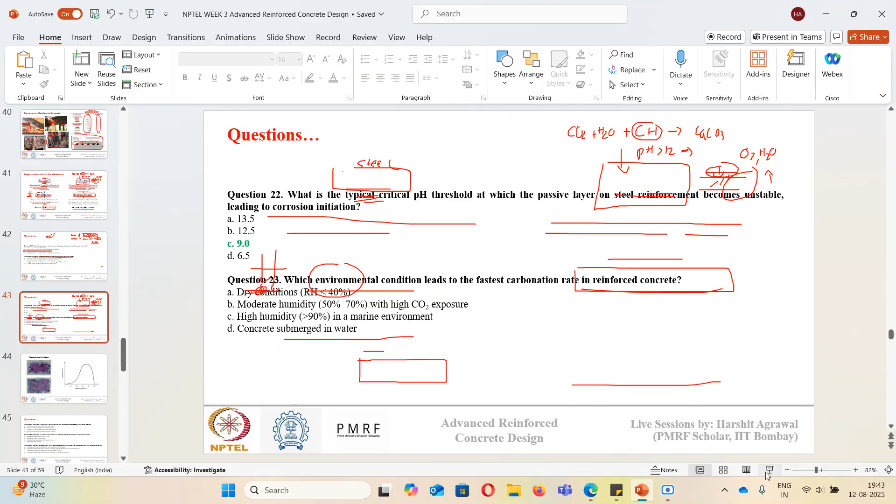Let me tell you what is happening. This reaction that you see here is a two-part reaction - I have written the final reaction. What happens during carbonation? Initially CO2 reacts with water to form H2CO3. Now this H2CO3 reacts with calcium hydroxide in the system to form CaCO3 plus water. We know in this reaction two things are important: CO2 and moisture. This is gas, this is liquid.

What will happen if I have very low RH? In a low RH system, there will be no moisture, so this first reaction won't occur, and carbonation rate will be very slow. However, if I have a very high RH system, like RH above 90%, even 100% relative humidity, there is a lot of moisture in the system, but diffusion of CO2 through moisture is very low. CO2 is a gas - it needs air voids to diffuse through concrete. If all the voids are filled with water, the CO2 won't be able to diffuse or penetrate much deep inside concrete.

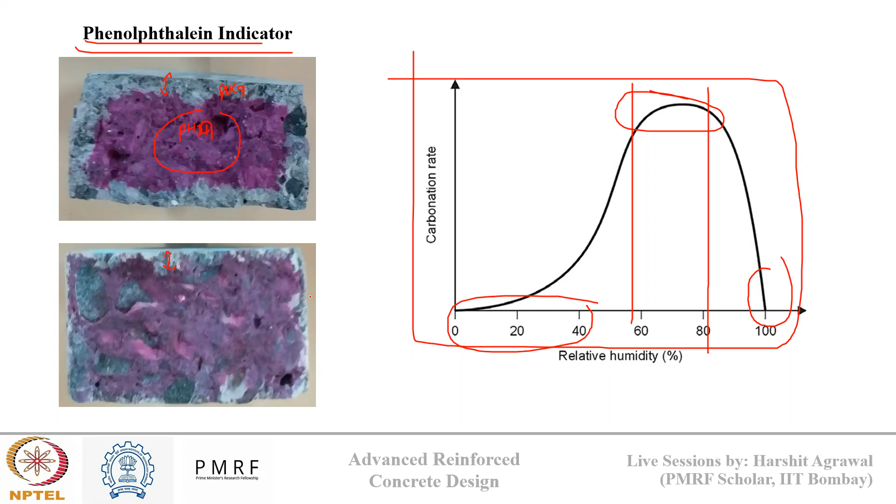It will depend upon the connectivity of pores also. Where the pores are connected deep inside the concrete, chloride ingress will be fast. Where chloride has reached the steel reinforcement, only that place it will break the passive layer - it won't uniformly break the passive layer. That's why we say it is a localized steel loss that happens when chloride moves through the reinforced concrete, and that type of corrosion is known as pitting corrosion. At a particular spot where chlorides have broken the passive layer, there only the corrosion will accelerate, forming a weak link for corrosion to occur.

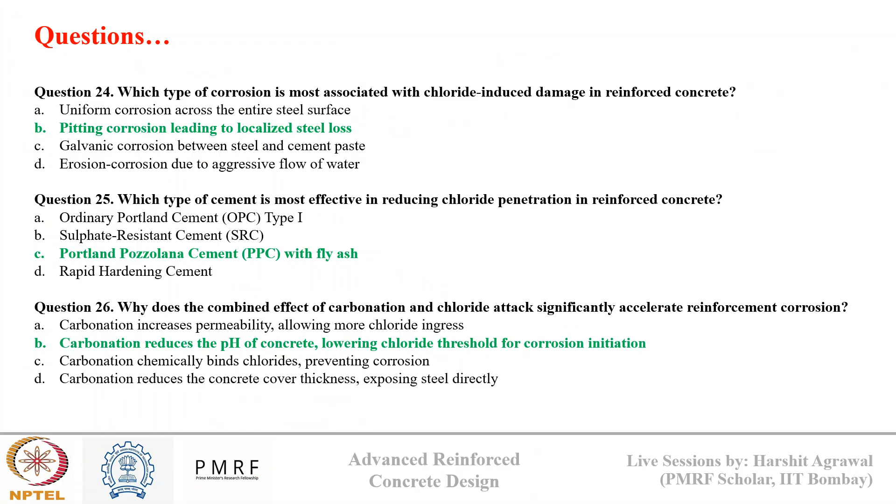Now, the final part in aggressiveness of environment is related to the mechanical degradation of concrete. Here we talked about three major degradation types. This is a very easy part, so I will quickly move through it.

First is abrasion of concrete. Abrasion refers to wearing away of concrete surface due to friction from solid particles, like sand or gravel, and this mainly occurs in high traffic areas or high flow zone areas. In water bodies, due to movement of finer particles over the concrete river beds, abrasion can happen. Or in high traffic areas, due to movement of vehicles, the rubbing of wheels with the concrete pavement surface can also cause abrasion.

Second is erosion damage. Erosion is much like abrasion. It involves progressive loss of concrete material from the surface due to the action of water flowing over the surface. This scrubbing action generated by moving water near the river bed gives rise to erosion damage in concrete.

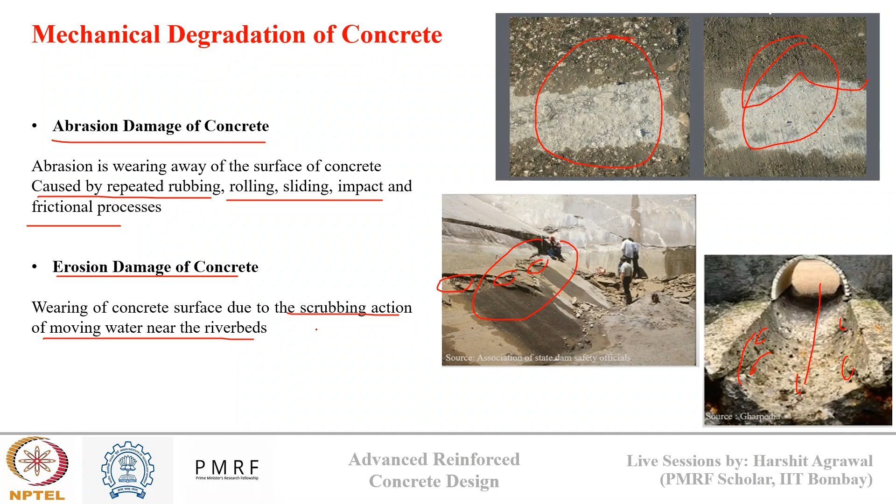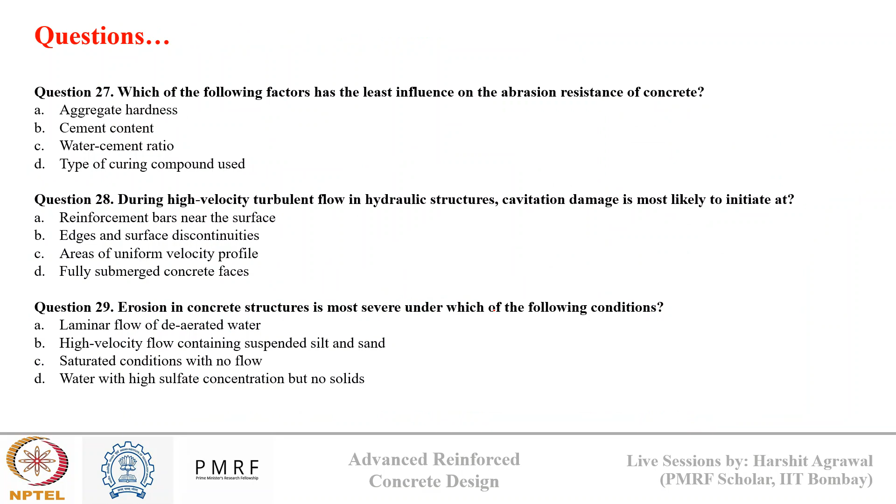Can anyone tell me the answer for question number 27?

Okay, yes, the correct answer is D. So, what type of curing compound we are using is not concerned with the wearing of concrete. Aggregate hardness matters: the harder the aggregate, lower will be the abrasion. If I have a denser microstructure of cement, my surface will have higher strength, which reduces abrasion. But the type of curing compound used will have the least influence.

During high velocity turbulent flow in a hydraulic structure, cavitation damage is most likely to initiate at which area?

For question number 28, the correct answer is B. The places where there are surface discontinuities and edges are where low pressure zones are created, and in these low pressure zones air bubbles form, which eventually collapse in high pressure zones downstream. So initiation happens near edges and discontinuities.

Erosion in concrete structures is most severe under which of the following conditions? Can anyone tell me in which condition erosion will be severe?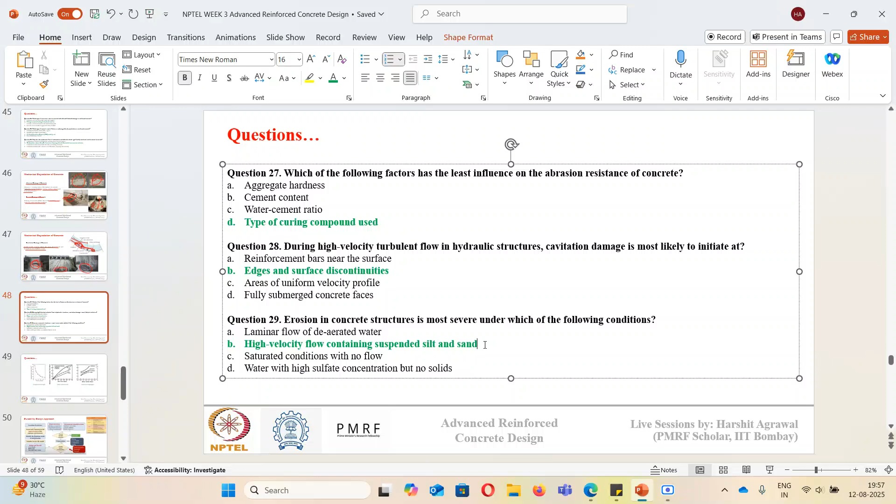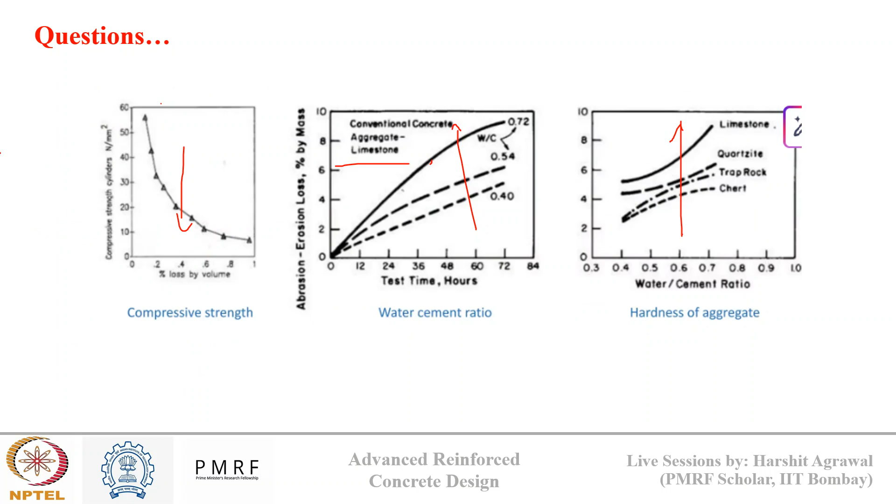Okay, now let's quickly move into the final segment of this session. We will take around 15 minutes more to complete this part. In this final segment, we will understand how durability is incorporated in design.

So in modern design, we know the location of the structure. Based on the location, we have standard categorization of exposure severity, or aggressiveness of the environment. So environments are classified into different exposure zones, and for each exposure zone we have given some guidelines. So what type of environment will come under what exposure zone is known to us.

Now we know where our structure is located, so based on these guidelines, we can decide what is the exposure zone of our structure. Now, in that exposure zone, we know which aggressive ion is dominating. So if I take a structure very near to sea water, I know chloride ions are dominating.

If I take a structure where there's a high amount of sulfate in groundwater, then I will say sulfate ions are dominating. If I have a structure located in an industrial region, then CO2 is something which is dominating. In a cold region, freeze-thaw is something which is dominating. So based on the aggressive ions present in the environment, I can choose a suitable service life model, which contains conditions on cover depth, binder type, and other durability parameters.

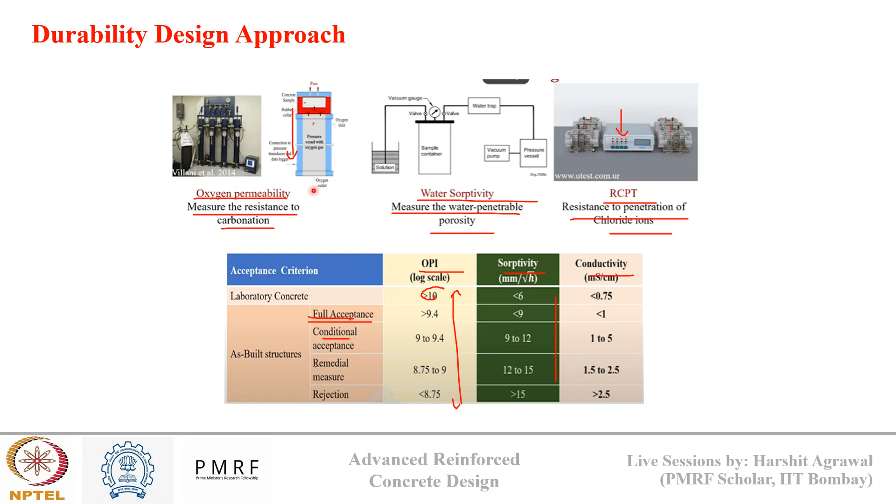Now, to set pass or fail criteria on these durability indexes, we use these durability testing indexes. You can see OPI, sorptivity, and conductivity, the different values observed from testing, and based on different values we can set different criteria, whether it is good, bad, or should be rejected. That criteria can be set based on the values observed from the simple durability testing. So this is what comes under the heading durability index values, used to test concrete before construction for durability properties.

Now, there are lots of tables and guidelines present in Indian standards for ensuring that adequate durability is considered while mixture design of concrete. So this slide has a table related to minimum service life that we want from a structure. We have the IRC 112 code which categorizes design service life of bridges into three categories.

There's normal design service life of more than 100 years, which is used for all bridges. For temporary bridges we need a service life of 10 years or less, and there are some special applications for which we need 20 years or as specified by the user. Based on the type of bridge and its condition, the IRC code specifies what service life is needed from the bridge.

Similarly, we have the IRS 1997 code, which is the Indian Railway Standard code, and it also categorizes service life of bridges based on location. Bridges which are near the sea need a service life of at least 50 years. Bridges in coastal areas need a higher service life, and bridges present in the rest of India should have a much higher service life.

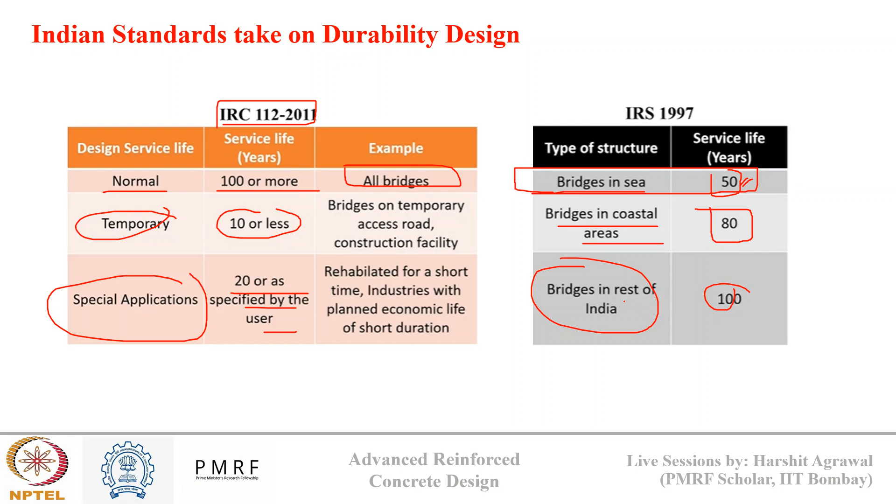So why do bridges near the sea have lower service life? Because they have more deteriorating conditions, so we demand a lower service life so that proper maintenance and repair can be done from time to time. However, bridges which are not near any aggressive environments should have a comparatively higher service life.

Now, based on condition and the aggressiveness of the environment, there are different classes in which the environment is categorized. There are five classes of environment categorization: mild, moderate, severe, very severe, and extreme.

All three codes, IS 456, IRC 112, and IRS 1997, have given different conditions of concrete exposure to consider in each category. I'll take one example: in IS 456, for surfaces of members in the tidal zone or members in direct contact with liquid or aggressive chemicals, they categorize those concrete surfaces under extreme condition. For different conditions, they have given different environmental exposure classifications.

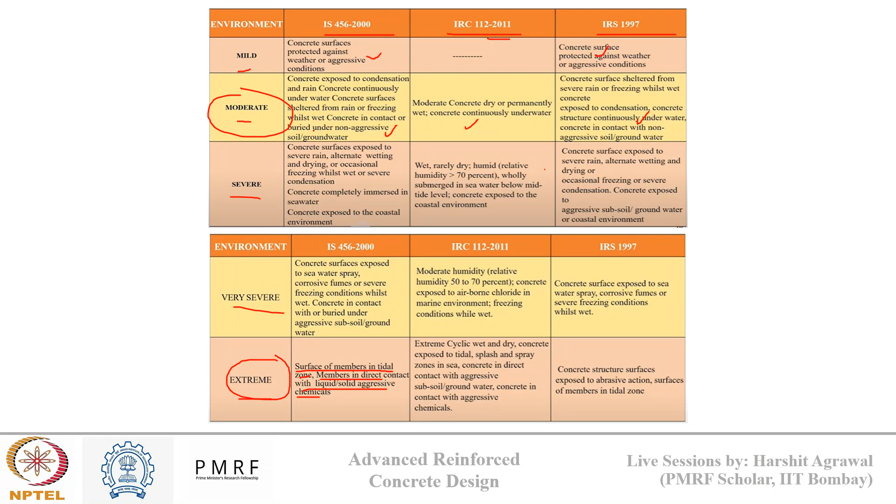So based on the location of our structure and the exposure condition, we can categorize our condition into these categories. Now, once we have fixed the exposure class, we need to set some boundaries on mixture proportion to ensure adequate durability is achieved by the concrete.

These boundary limits are set on three parameters: water by cement ratio, cement content, and cover depth. Why these three parameters? First of all, the W/C ratio governs the porosity of concrete. Higher the W/C ratio, more the porosity, so faster the ion ingress. That's why we set a limit on maximum W/C ratio.

For different exposure conditions that we classified from the previous table, different codes specify the maximum W/C ratio allowed. Ensuring the W/C ratio stays below this value means we are following the durability guidelines of the standard provisions. Then there is a limit on cement content.

Cement content not only dictates the strength, but also dictates the heat of hydration, thermal effects, or shrinkage cracking in concrete. That's why there is a limit on maximum cement content in concrete, which is 450 kg per meter cube in the IS code. However, the limits vary on minimum cement content.

This maximum cement content limit is the same for all exposure conditions because it is related to the heat of hydration generated. However, the limits vary on minimum cement content because it governs the porosity of concrete as well. That's why we have limits on minimum cement content, and for different exposure conditions there are different values mentioned in the code.

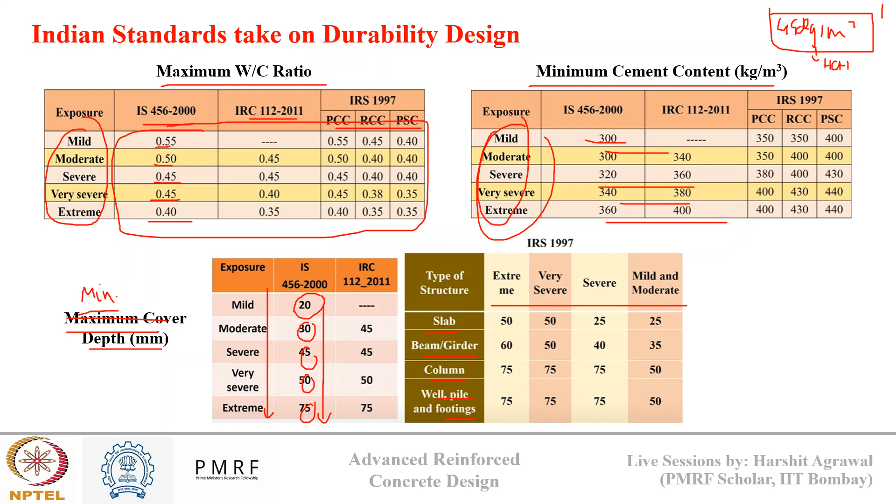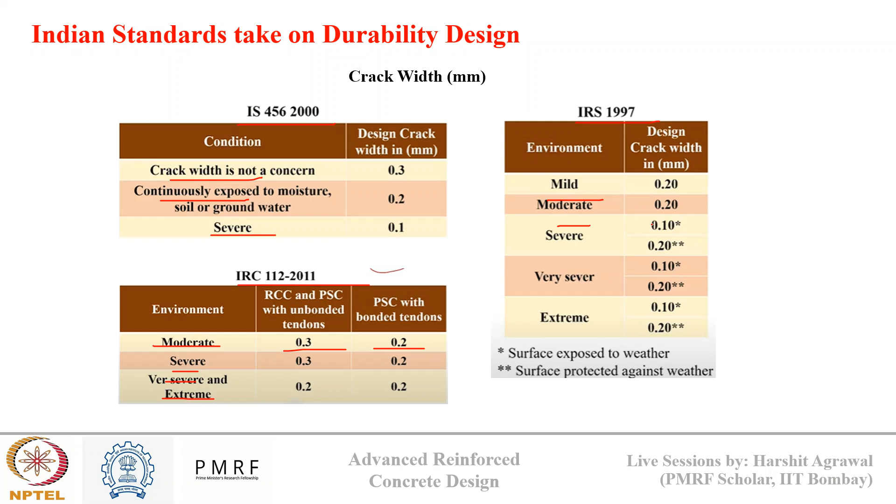Now there are limits on initial crack width also, mentioned in IS code, because if there are wider cracks initially, even though we have followed all the design parameters properly for W by C ratio, cement content, and cover depth, ions can still easily penetrate through cracks. So different codes have different say on this. IS code has a different say on crack width, whether it is a concern, not a concern, or a severe concern. IRC code also mentions for different exposure environments the limit of crack that should be present on the surface, and IRS code also mentions for different exposure environments the limit of crack that can be there on the concrete.

Now, finally, there are limits on the aggressive ions that are present in the concrete. We have maximum limits of chlorides and sulfates because these are the main chemical degradation ions. As we discussed initially, if there are more chlorides in the concrete, that can lead to earlier corrosion inside the concrete. That's why there is a limit on maximum chloride mentioned for different types of concrete in IS 456. Similarly, there are limits mentioned in IRS and IRC codes for different exposure conditions on the limit of chloride ions inside the concrete. Similar limits are mentioned for sulfate ions also.

For sulfate, the main source is underground structures, where concentration can vary based on the soil and the groundwater. So for different concentrations of sulfate in soil and groundwater, different types of cement are recommended in IS code, along with recommendations on grade of concrete, cement content, and maximum W by C ratio.

For freeze and thaw resistance also, some limits have been mentioned in IS code, IS 456. Based on maximum aggregate size, the maximum amount of air entrainment that can be in the system is mentioned in IS code.

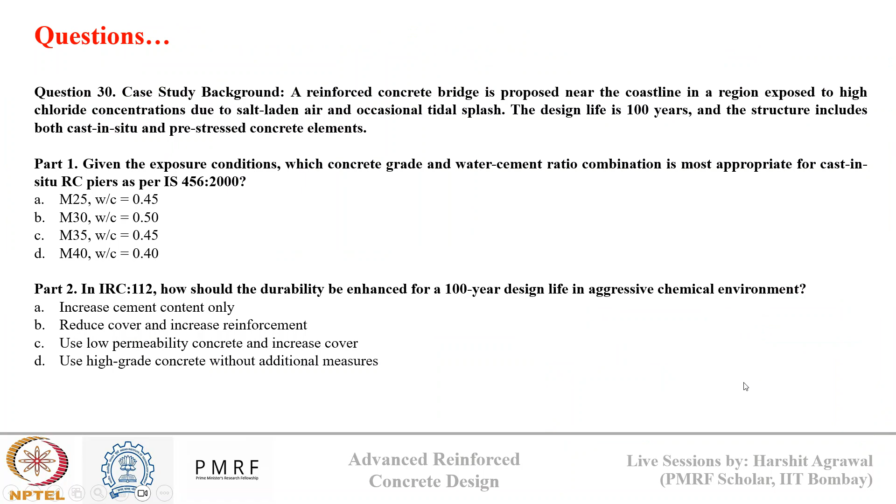Okay, so based on this durability criteria part, try to answer this simple case study. Any doubts in this final part, like different tables, different design codes, what are they saying, why they are saying these things?

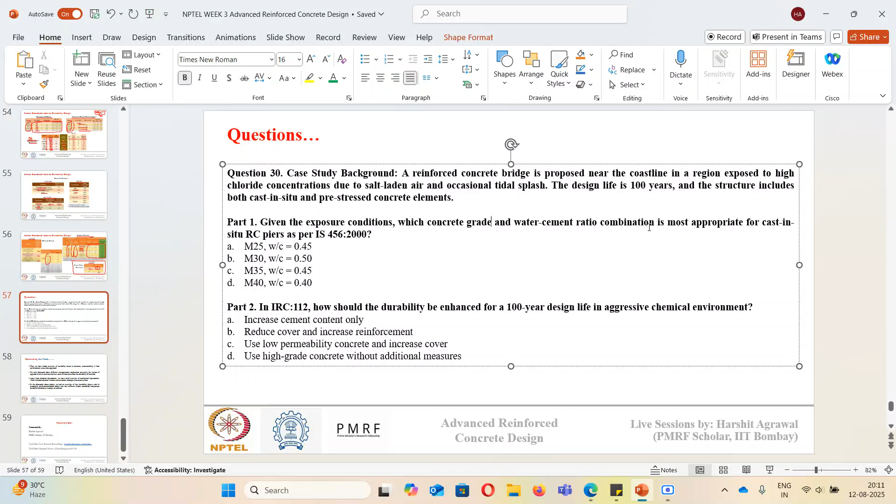So can anyone answer this question? This is a case study where a reinforced concrete bridge is proposed near a coastline in a region exposed to a high chloride environment. The design life is 100 years and the structure includes both cast-in-situ and pre-stressed concrete elements. Given the exposure condition, which concrete grade and water-cement combination should we follow?

So from this keyword we got to know that our structure is in extreme condition, and then we went to the table which sets limits on different parameters to get the answer.

In IRC 112, how should durability be enhanced for a 100-year design life? What does IRC code say to enhance durability? The correct answer is C. IRC code is more oriented towards having lower permeability concrete and increasing cover of concrete. That is their main basis for ensuring higher durability of concrete.

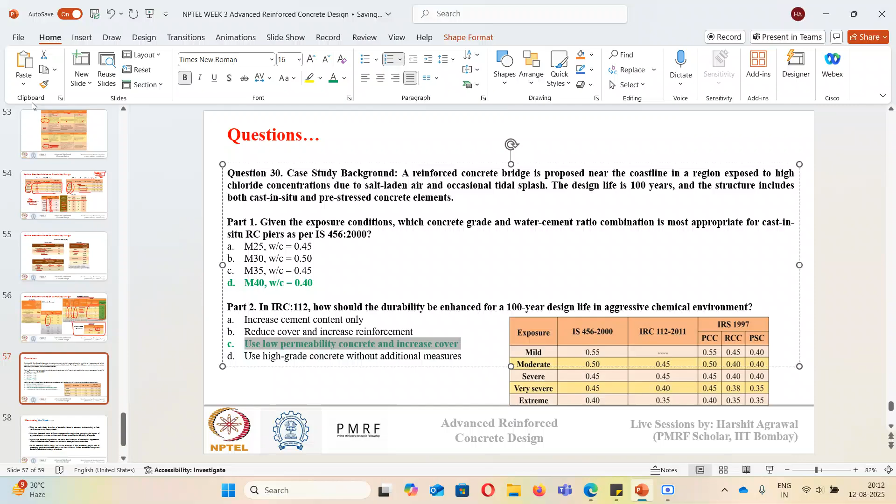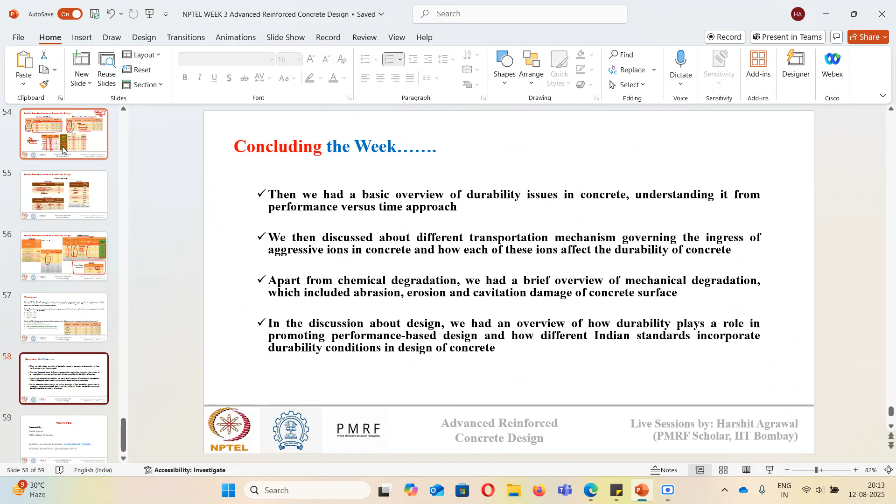So this is how we read the tables. From each of these tables we get some insight into the durability parameters, and these tables are interlinked to each other to get the different conditions or criteria set for concreting, to ensure that concrete is of good quality. So this was all about this week. We completely discussed the durability issues in concrete. We understood different transport mechanisms, different ions responsible for degradation, mechanisms of degradation due to different ions, and how design incorporates durability. Thank you.